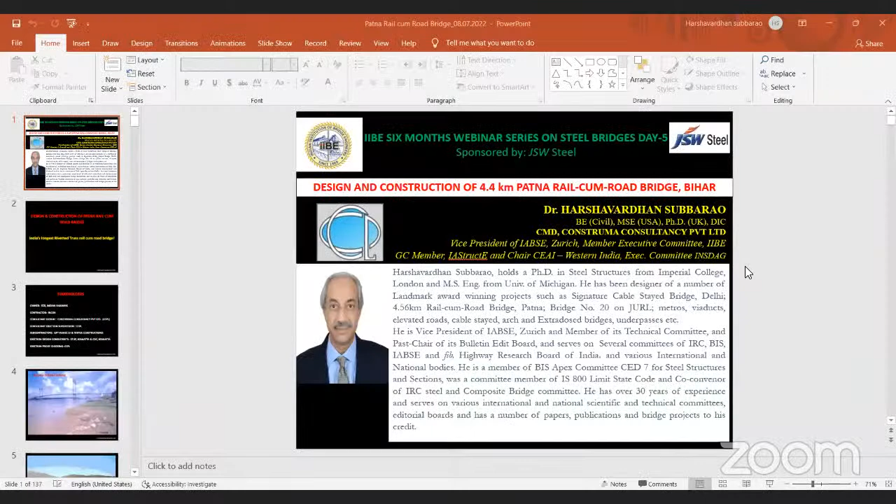Good afternoon all, rather good evening. I was late in joining, so I apologize. That was our Prime Minister on the road, and he held me back by reaching you by 40 minutes.

So on that note, I want to talk to you today about quite an achievement of mine, something I'm very proud about as a bridge designer. In fact, it's as significant as the design of Signature Bridge, the cable stayed bridge in Delhi. This is the Patna Rail cum Road Bridge, which also is in steel, just like the Signature Bridge Delhi. It's a steel and steel composite structure.

Here we're going to talk about trusses today, 36 trusses of 123 meters each built over the Ganga at Patna. And I'm going to talk to you about that today. If there is time, I will move ahead and speak about the other part which I want to talk about, the advantages of building in steel. Okay, so let me start.

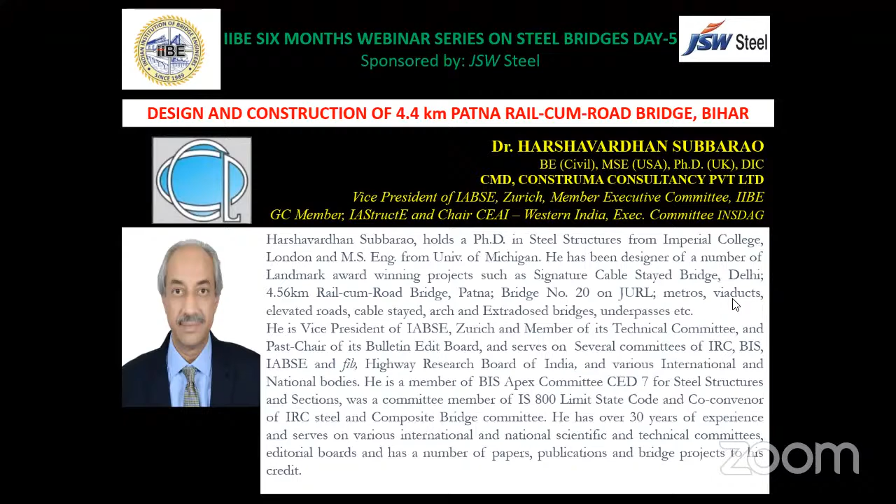So it is the longest riveted truss rail cum road bridge. Bogibeel is welded, and this was the last of those long riveted steel bridges. It is also the third longest bridge in India, they say, on a river.

I want to come to the topics straight away. The stakeholders: the Indian Railway, the contractor IRCON, us as the design consultants, my company. We were also the erection supervision consultants for the entire project. The subcontractors were GPT, Rahi, and Tantia Constructions for IRCON, one on each bank. The erection design consultants for the erection schemes were TUP from Kolkata and CDC from Kolkata. The proof checking of all those erection schemes was again done by us. So this was the project.

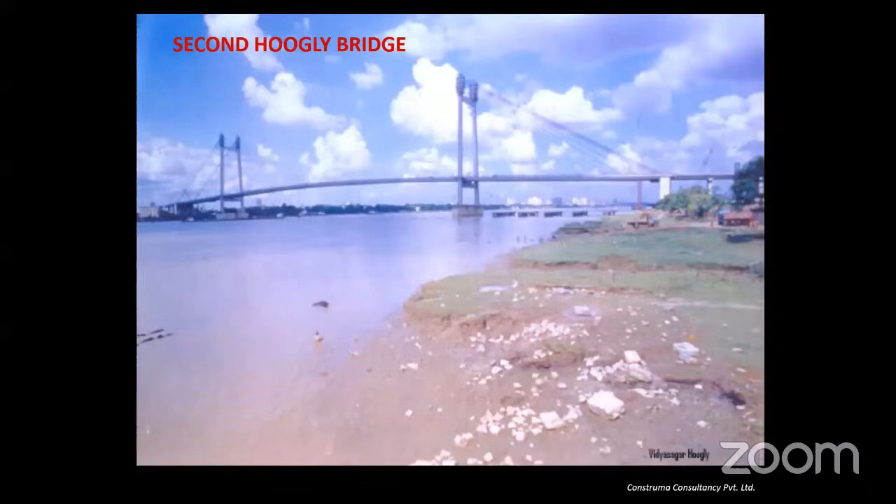As you know, there are a number of lovely bridges that are built. You see here this second Hooghly Bridge, which is also in steel with ladder deck construction. Steel has been around in India for quite a long time in advanced construction and also in various other kinds of bridges.

And I was very proud to be involved with its design and development, and seeing it through till the end was a particular joy. The cable stay bridge has a different type of behavior than the one we are going to discuss today, but I thought I should tell you about where we are going. It's probably our most technologically advanced bridge in India.

A brief about our particular bridge, the Patna Rail Cum Road Bridge. It was originally a rail bridge. Then the National Highway Authority asked the railway for converting it to a rail cum road bridge. So a rail-only bridge with a single track of rail was converted into a rail cum road bridge at the behest of the National Highway Authority.

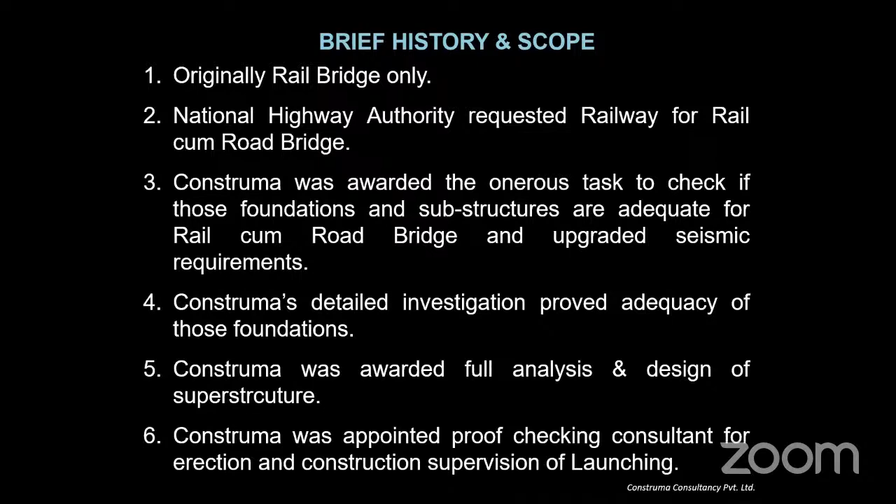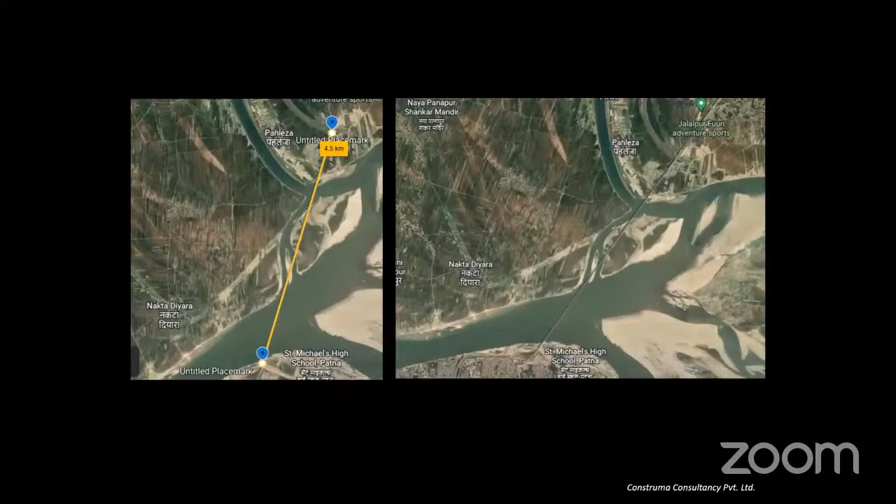You can see here on the right side photograph the already built bridge, its existing alignment. You can see how the bridge spans from one end to the other. In fact, if you stand on the shore at one end, you don't see the other end — it is so long, it's over the curve of the horizon, more or less.

So here you see the road deck, and the rail has a different aspect, which you can see in the bottom right: the rail being on the lower embankment, the road being at the higher deck, both integrating and crossing the river. You see this here very clearly. So that's the general alignment we had, the location and so on, with Pahleza Ghat being shown there.

To give you an idea, those are the two end makeup spans of 64 meters, joining NH19 on that side, NH98 on this side, and the Chapra Hajipur line on that side of the Ganga — the railway line on that side, and the main railway line on this side of the Ganga: Delhi, Mughal Sarai, Howrah, etc.

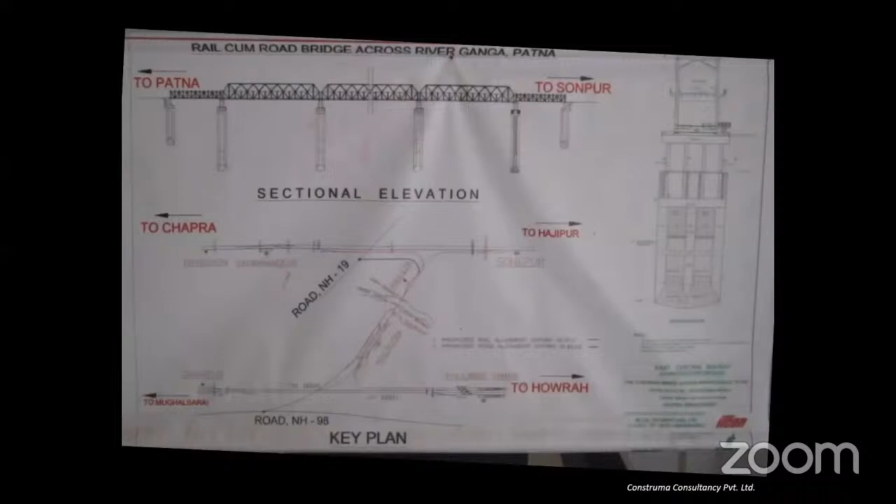It was very strategic to join both these across the Ganga, both from a railway's point of view and for vehicular traffic, because the Ganga bridge at Patna, the MG Setu, was in very bad shape, and this could provide relief. You see on the right the concept that was initially evolved, and then how we went about a span arrangement of 123 and 119.6 meters.

Today I'll be speaking to you about the larger span, not the smaller span. Maybe on another occasion I'll speak about the smaller span, it's not that exciting. You see here the depths of the foundations, 40 meter, 45 meter deep.

The plan at the rail deck, initially as it was conceived, was only for one railway track. These are all from railways' earlier records, for which the foundations were already built, the double D well foundations with these piers, which I'll show you. This was the plan at the rail deck, this is all it was for.

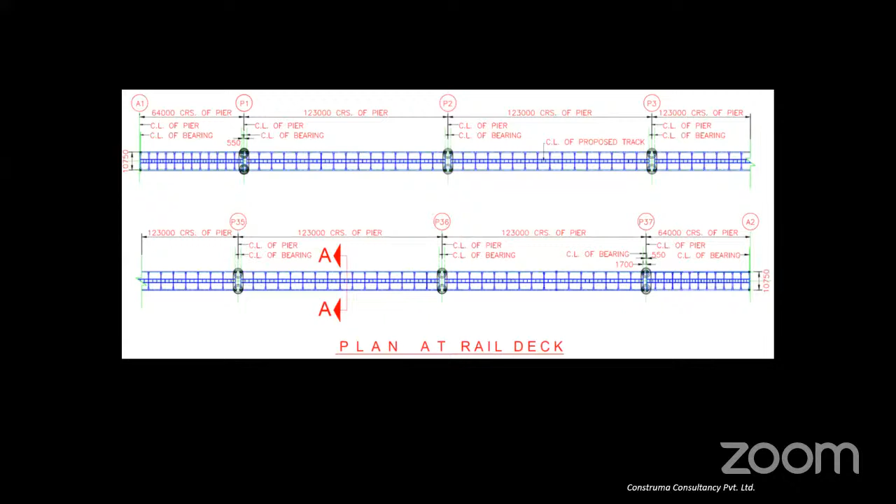So far, it's the longest span truss railway bridge, 2 into 154, which were earlier constructed and was in place and operational on the Jammu-Udhampur rail link, yet to become operational at that time, was already done by us, and we had done that in 3D. That experience helped us a lot and gave us confidence in this design.

The steel truss is an end diamond type arrangement, slightly modified, with 16 panels of approximately 7.45 meters, a height between the centers of the bottom chord and top chord of the truss of 18.25 meters, and a width of 10.925 meters.

All the bottom chords and the first and last diagonals of the truss are box sections, because we wanted their torsional ability and strength. The rest of the sections are I sections, including all cross girders, including the end cross girders, so that we can facilitate joining to the top and bottom chords which are box sections. The I section frames very easily into a gusset at that location, whereas a box on box connection is very much more difficult to frame.

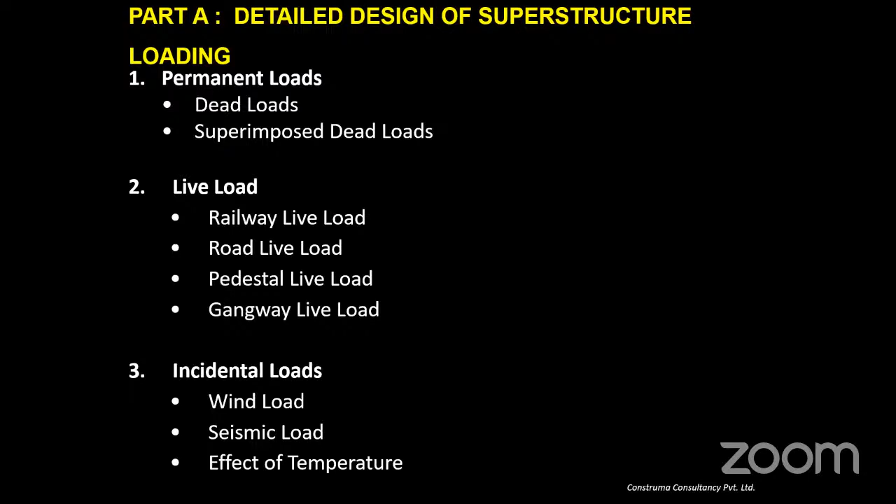The bearings are pot PTFE type. For the detailed design of the superstructure, we considered the permanent loads, dead load, superimposed loads, live loads, railway live load, road live load, pedestrian live load, and gangway live load for when there are gangways at the railway level, for people and equipment carried on those gangways. Then the incidental live loads, of course wind, seismic, and effects of temperature, being a steel truss of a large length.

Earlier railway trusses are analyzed as pin jointed in 2D, but because in the 154 meter span of bridge number 20 we had done a full 3D FE analysis with space beam elements, 6-degree independent degree of freedom space beam elements, we were very much confident, and we went for a full 3D analysis here too. It is correct that it is not pin jointed.

Hitherto, everything was being designed as pin jointed 20 years back or so in the railways, a pin jointed behavior at each joint. But the gusset is very rigid. The number of rivets or bolts that come into a gusset make it extremely rigid, and it lends beyond partial fixity, almost full fixity at that joint. So it is justified to use not a truss element, but a space beam element with 6 degrees of freedom at each node.

That is how we went about the entire project, because this is actually the truth. When the gussets are so huge, they're taller than me, some of the gussets are huge, so there is obviously fixity, and we treat it as a rigid jointed truss, not as a pin jointed truss. That's why we did the space frame analysis for the whole structure of 123 meters.

They are simple support, each span, the spans are not continuous in that sense. They're simple support spanning 123 meters between two piers. Now, wherever the joints were there at the rail level, the same joints were carried up into the road level, which is at the mid level of the truss. All the joints are riveted with HTS, high tensile steel.

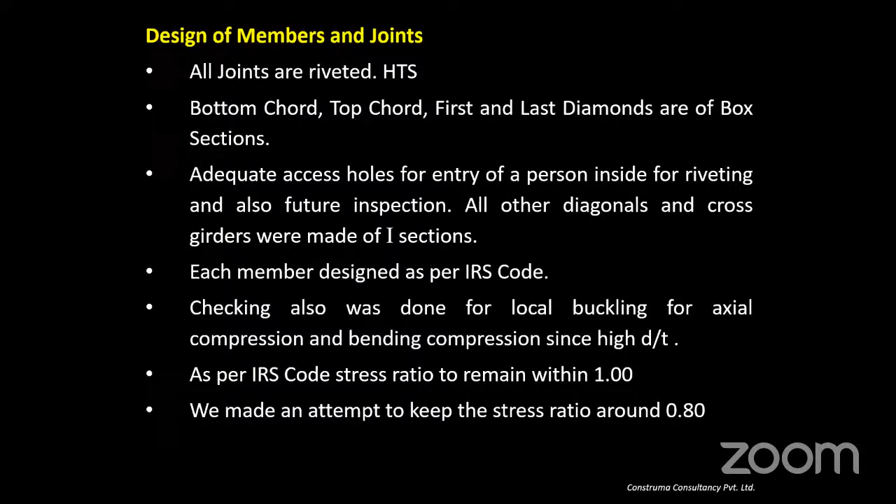Now, provision of pre-camber is very important because when launching, there is only the steel and nothing more than that. When launching the truss, to counteract the deflection, we need to consider only the steel, since there is no concrete yet in place.

Then when the dead load plus SIDL is added, the concrete deck is put in along with crash barriers and all that. Then live load applies. So to counteract the deflection due to dead load plus live load in the final condition, the truss will become flat under live load movement of the train especially, and the road will become flat. Then it goes back to a hogged-up condition of camber, which counteracts these deflections that accrue over time, and relaxation in the joints giving a permanent set of deflection over time.

To guard against that, and also against secondary stresses that happen because, for example, the neutral axis of members framing at a joint are not at the same working point - they are up and down, the members' neutral axis will be different, cross members' neutral axis and main members' neutral axis may differ, creating secondary moments - we resort to giving camber, which is a very important requirement of such a long truss, and getting it right is very important.

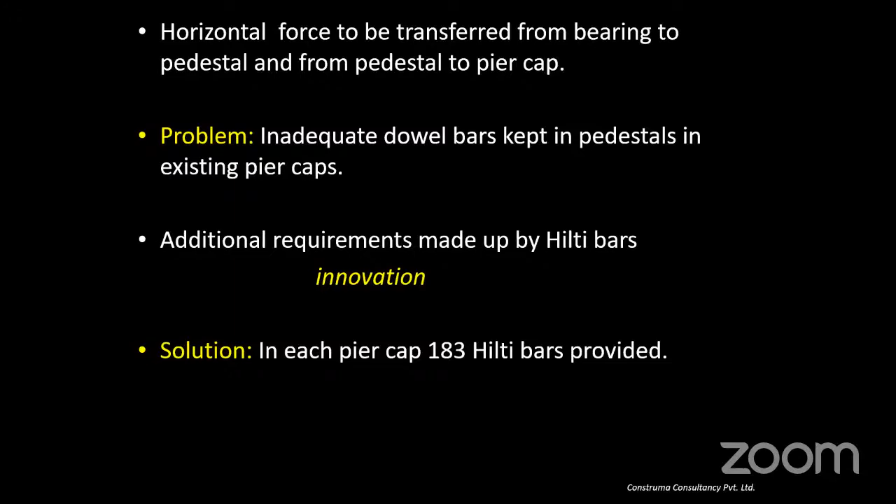Part B of this, which was assigned as the second part of our scope of work, was the proof checking of the already constructed well foundation structures and pedestals to check their adequacy for this increased rail plus a new full bridge deck, which we were putting in the middle. I'll discuss the unique arrangement we made, and how, whilst everything was okay, the pedestals were inadequate, especially for seismic shear and for the restrainers. We innovated quite an amazing thing, which I'll share with you in the next few slides.

Part C of our assignment was the proof checking of the erection scheme of the superstructure. Each contractor had their own specialist consultant, which provided different schemes somewhat. We had to be doubly sure that over the Ganga, launching 24 hours, 365 days a year, there would be no untoward incident when we're about 60, 70, 50 meters over the Ganga River at all times.

So this method of erection was one in which the anchor span is first done. It is used as a ballast, and some tie elements are put between this existing anchor span on staging on each shore, which serves as a ballasting span. We connect it with the link element system, and we then start forward cantilevering from pier 1 to pier 2 in the free air, 123 meters all the way across the Ganges. From pier 1 to pier 2, we triangulate and build up the structure with an overhead crane, and I will show you how that is done.

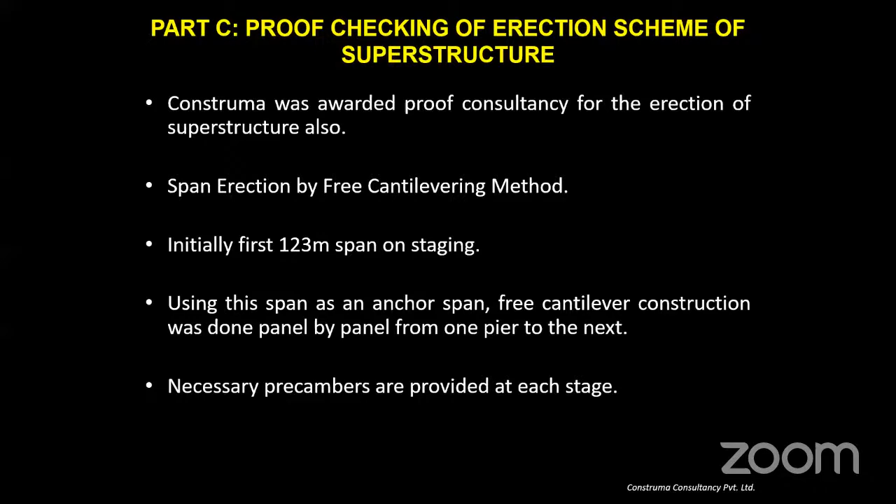Of course, it is very important to have the camber, as I discussed, and that camber has to be designed in and ensured during erection.

There were many contributions we made as a proof consultant, especially on the erection. Because of compression buckling, we had to increase the grade of the steel to 590E from what was a 350 grade or 250 grade, the normal grade we were using. We had to increase the grade from 490 to 590E, a huge increase in the yield stress, and also the thickness of the lower chord elements between the two nodes, L0, L1, and L1, L2, and similarly in the uppermost chord, and then there's a middle level for the road deck.

And the uppermost chord, U1 to U3, we had to change the grade of the steel to HT steel from what it was designed, just because of the erection requirements. Of course, you can imagine why you need that.

That is because the bridge will tend to sag when it is in its fully built condition and in service, but during erection it will be hogging. The bottom chord will come into compression, and when it's at maximum cantilever before it touches the other side, you have the maximum downward sag bending, putting in-plane compression and bending compression, which cumulatively grows due to the weight. And at the L0 node and at the U1 node on top, you get a counteractive couple, contrary to what should be in the normal design.

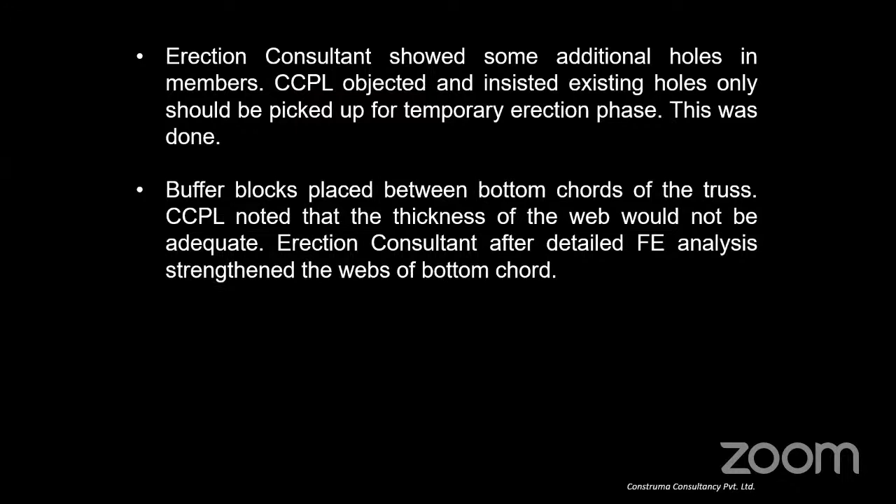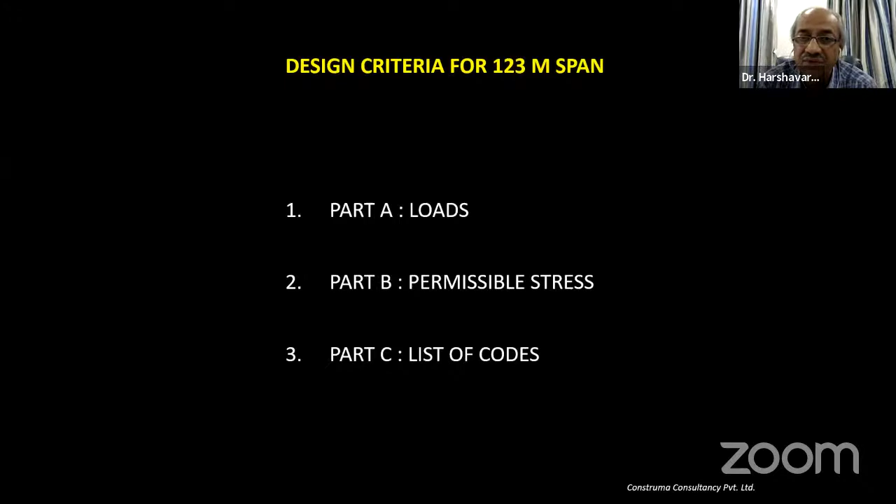So I will now tell you about the design criteria for a 123 meter span. It is in three parts: the loads, the permissible stress - mind you, it's a working stress elastic design, a permissible stress design if you so call it - and what are the various lists of codes for a bridge like this.

Typical loads: it is MBG loading, and you have bending moment, shear, and CDA - CDA is the dynamic augmentation for railway. For a main truss, the two nodes are so far apart, and this gives the bending moment per span, and so on. These are the loads that are coming. So we develop a design criteria for the design of all the elements in bending and shear, and whether they are subjected to dynamic augmentation - something like our impact factor for road bridges - and what the multiplier should be for the CDA for each of the members, and what length should be considered for each member.

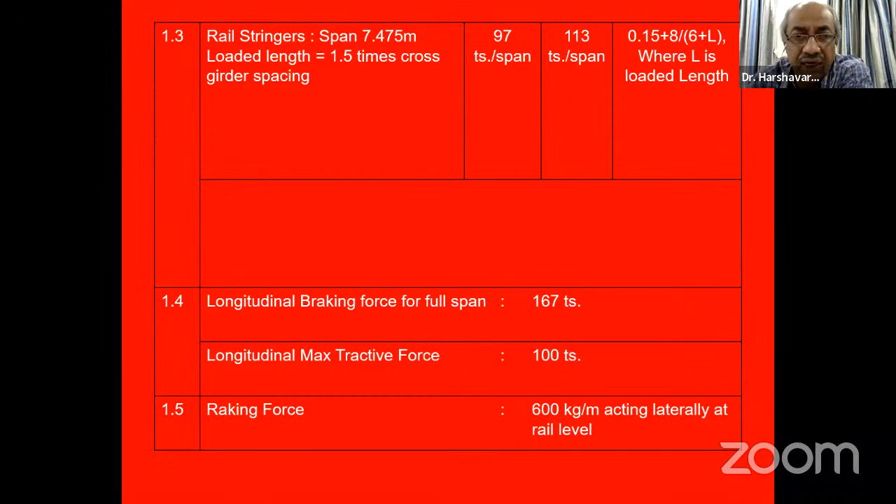All those things are laid down in the loading, and for the road deck also it is from IRC - the road deck, 2 lanes of 70R or 2 of Class A etc., and where it will be positioned. All that is laid down in the design criteria, and the deck slab, the dead load, how thick, etc. - all those things are laid down, the cross girders, everything, the wind that has to be considered, the seismic loading of 0.12 G.

Incidentally, 0.12 G came from a site-specific study. We had earlier designed Munger Bridge, so three bridges - Munger, Patna, and Bogibeel - had very high quality site-specific seismic studies done. When we designed Munger, which had a 125 meter span, 2.6 kilometers long, it was realized that site-specific seismic study must be done for these three important bridges, and a jumped-up factor of 0.12 G is the design requirement based upon a site-specific seismic study for this location. In fact, for all three locations, we were given higher values to design for.

So there are certain bridge rules - the IRS in railway have a document called the bridge rules, which lays down all the loadings etc. for the railway part. For the road part, we take from the IRC 6.

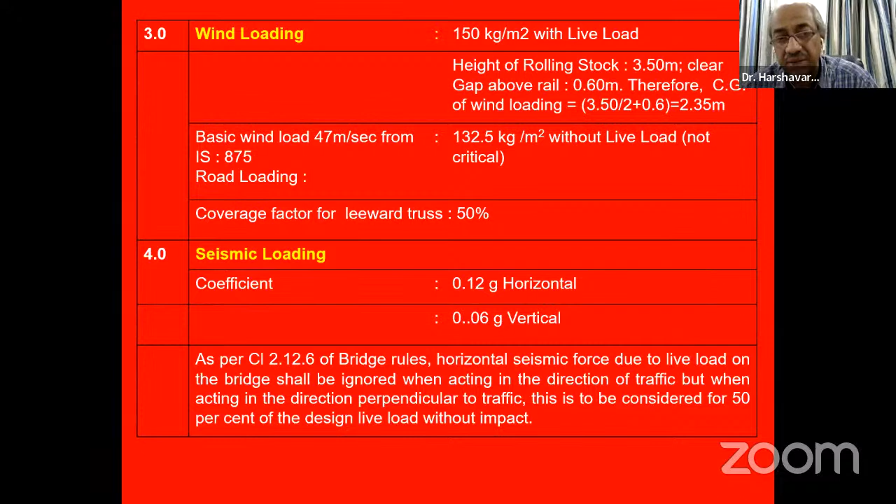And then, of course, there are some overriding clauses when seismic is considered. For example, horizontal seismic force due to live load on the bridge will be ignored when acting in the direction of traffic. But when acting perpendicular to traffic, 50% of the design live load without impact shall be considered for seismic mass. So there are some overriding clauses which we have to cleverly take.

And since it is largely dominated by behavior under live load of a train, the live load by road and the road deck is trivial compared to the railway loading as such. So we, of course, biased that clause, and we have to accept that clause and utilize that kind of combination.

So then you have temperature, the derailment load, which was not considered in this project, density of steel - all these things are laid down typically, where to put the jacking, etc. What should be the girder deflection should be limited to L by 600.

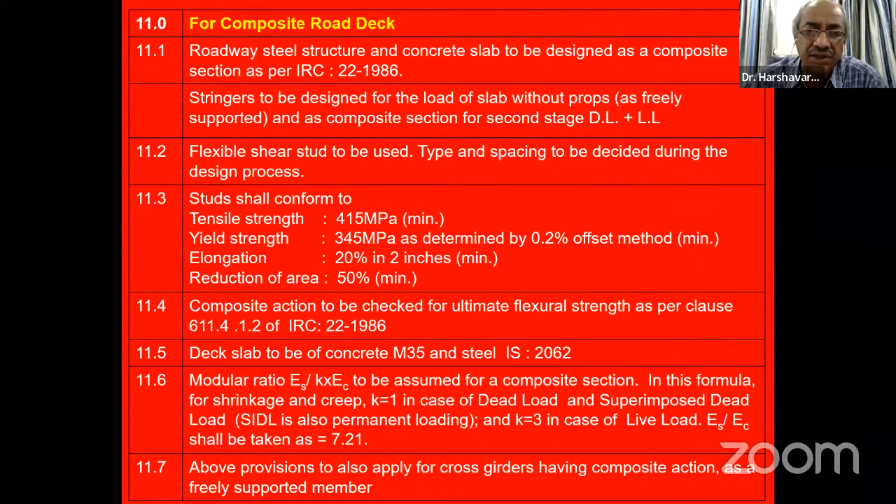All that is laid down, and then for the composite bridge deck, what should be the strength and yield strengths and so on, where the stringer should be, and what they should be the primary phase for, and in the secondary phase when they're made composite, what loads they should be designed for, what should be the long-term modular ratio, what should be the creep and shrinkage that we had to consider, the shrinkage especially for concrete. So all that is laid down in a typical design criteria like this.

And here, in railway, unlike us running our train of vehicles across in the analytical software - we use STAAD Pro, Midas, whatever - in the railway it is made simple. We convert the particular train which is under consideration, like an MBG loading or a 25.5 ton axle loading.

They have different classes of loading like that. We convert them into an equivalent uniformly smeared distributed UDL. It's made very simple, and the bridge rules lay that down. And we simply have to take that and multiply it by the impact factor, like what you see, the CDA.

So it is very simple to convert the tractive force, the braking force, etc., which are particular to railway, into a simple design table like this, and to also consider the loading in the form of an equivalent UDL for that particular train based upon the bridge rules. So it becomes a very simplified approach to the live loading consideration, and the impact factor is directly considered based upon the length of the member under consideration for which impact is being considered.

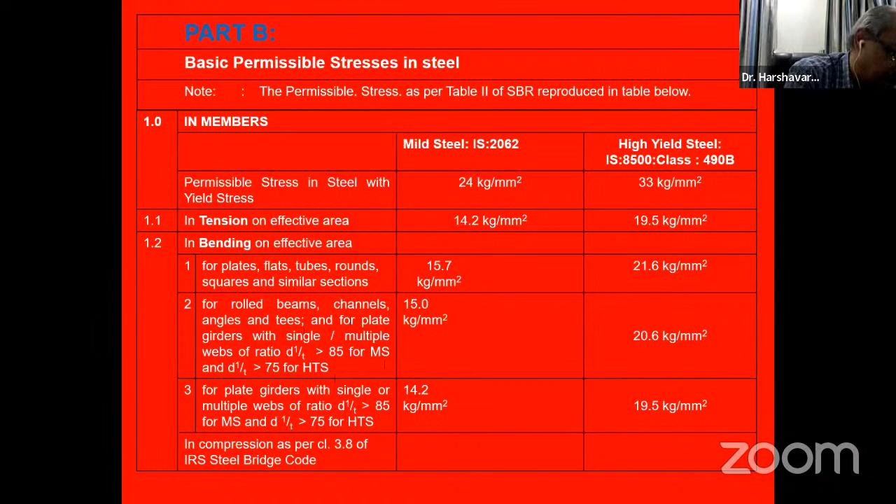So you can see the kind of sorry.

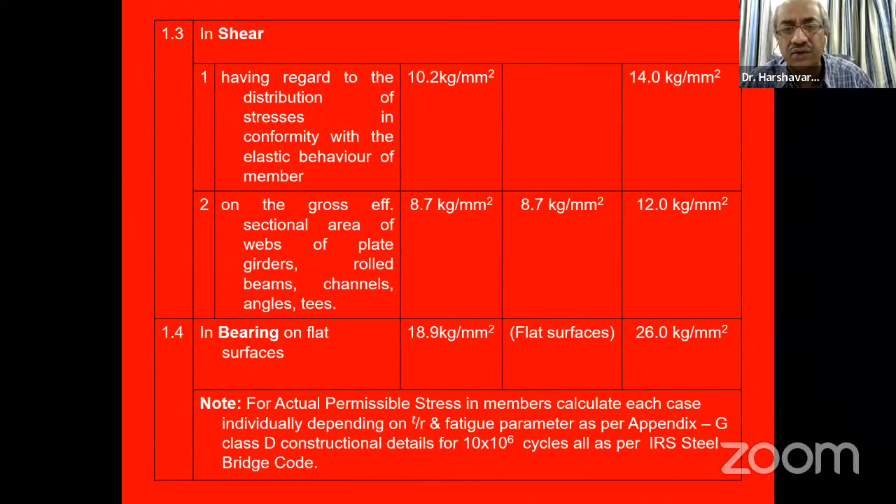Right, so you can see the kind of permissible stresses in tension, in bending, for plates, for different elements, in shear - the permissible values which cannot be exceeded. And this is also now declared by us in our design note based upon the L by R, the fatigue, so on and so forth.

We take it from the bridge rules. Then similarly, the rivets, if they're in mild steel or in high tensile steel, the code to which it is and what it should be, etc., in axial tension, shear, and bending, what should be the allowable stress in the rivet, and whether they are shop power-driven rivets or field rivets - for field rivets the values will be much less.

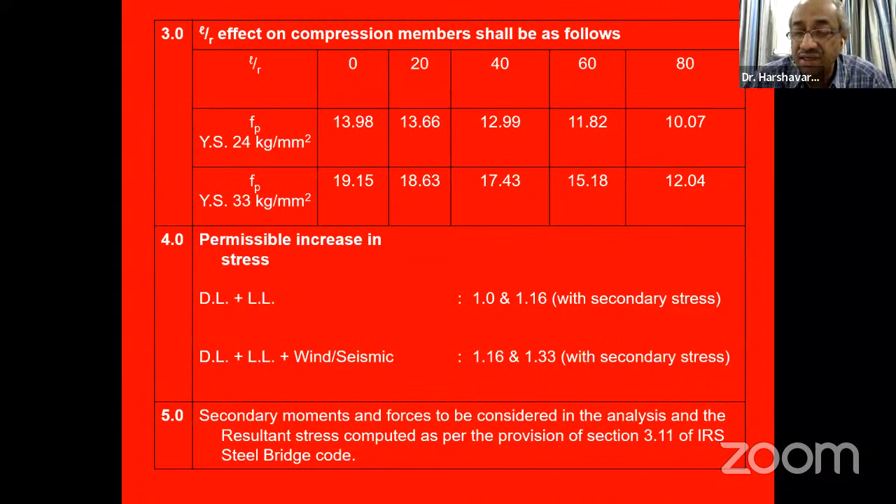So now the L by R effect on compression members, because of course it's a chord, compression, bending, truss-like behavior with some bending is bound to be there, and what are the permissible increases in stresses? When we consider secondary stresses, we're allowed to increase for wind or intermittent actions like wind or seismic, rare events. We're allowed to increase with secondary stresses by 1.33, for example, when we consider the secondary stresses, which we have done because of the nature of our analysis also. So that is the provision. Now, workmanship - there are rules for workmanship and so on.

A list of the various codes to which you design a railway bridge. Any railway bridge has its own codes, but the main codes are, of course, the steel bridge code. It's like your IRC 112 for concrete bridges or your IRC 24 for steel bridges, the mother code. And the bridge rules, which is similar to your IRC 6 for the loading consideration, the allowable stresses, etc.

Then the schedule of dimensions, the moving dimension, very important. You have to clear the moving dimension envelope for that particular train and that particular form of loading. It is declared; you cannot ever infringe into it with any of your structural members. Similarly, the welding follows the welded bridge code for welding requirements and fabrication, and the code of practice for welding, riveting, and the Indian bridge manual at site.

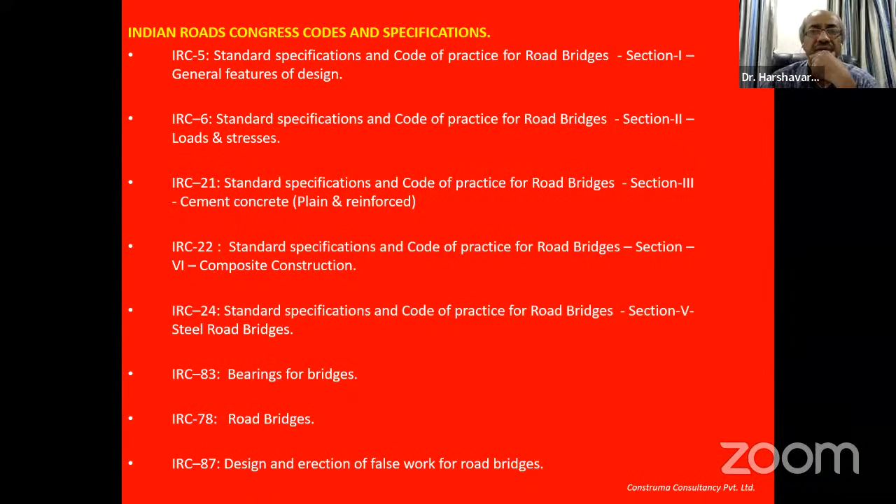The road, I think many of you would know, we have so many of our standards for this. And the bearings, of course, were done to IRC 83 for the whole bridge. The design was based on IRC 83. So that covers other elements such as welding, oxygen cleaning, radiography, how it should be done, and so on and so forth. So many things are covered there.

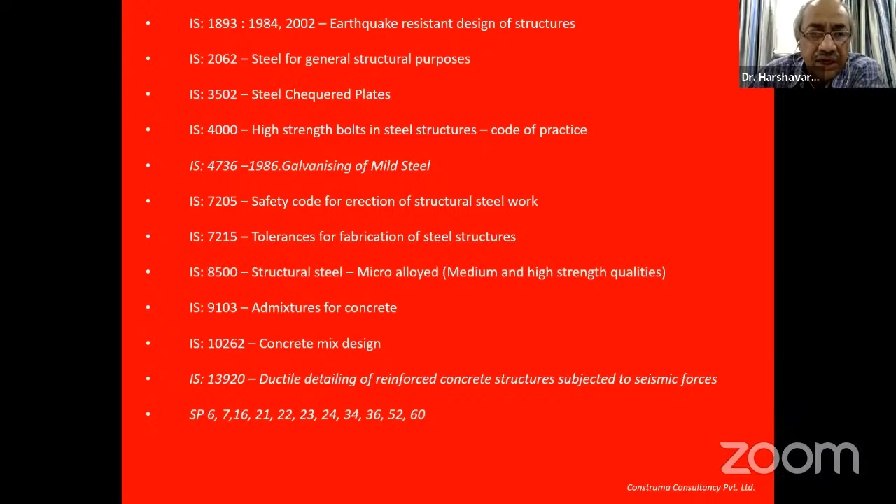And then your IS 1893 for earthquake resistant design, 2062 for that. Then the concrete of the bridge deck, what all code compliances are required for the various elements, etc. And the various special publications of IRC, etc., and of IS also. They are all listed and given. And then the order of preference for international codes, in case we don't have our codes to cater for that, the order of precedence to adopt international codes, all that is clearly stated in the design criteria.

So what I showed you is an example of what a design criteria should be, how important it is to have it in a project before you start, get it agreed by the owners and the contractors, and that will now guide us for the complete design of the project. This is what I want to tell you about the design criteria for a bridge such as this, how you do it, what you lay down, and how it is structured.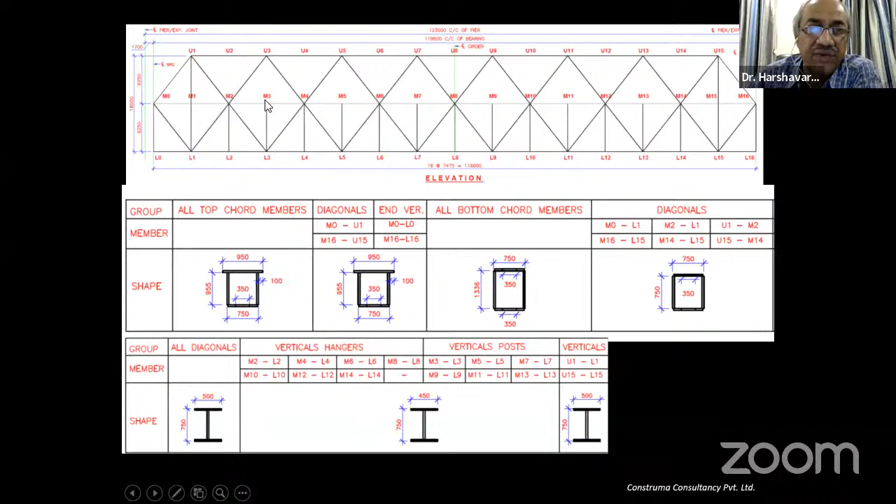See, these are posts, taken from the bottom holding up the bridge, the intermediate deck, road deck. Whereas this is a hanger, taken from that connection, from that intersection down. These are called hangers, and the ones which hold up without any connection at the top are called posts. So hangers are at the intersection holding up there, and these are posts. Okay, so that is the nomenclature we have.

Then if we look at the truss from the top, the top plan, looking at the top of the truss, then we have what is called here a kicker. Typically this is a K-shaped bracing, this is a kicker, and these two elements are tubular members, specifically done so. I will explain to you. They're tubular members set very close to yield, and there's a lot of innovation in this project which I want to talk to you about. I'll speak to you as it happens, what innovations we did.

You see here, it is flattened, but actually this is an inclined plane. From use, the end is actually inclined from here to here. In that plane, we have a particular inclined truss called the portal bracing, which is extremely important to stabilize because all the instability accrues and goes to the end panel. In that end panel, because it is inclined at the top, we have this special wind-based bracing and this very rigid requirement, and it is critical for most truss type bridges, this end portal, with this particular portal bracing in it, very critical.

And to make it rigid and prevent sway and ensure the load path down towards the bearings through the members all the way to the bearings at the ends, because the bearings will only be at the four corners. So at that point, we have to ensure the load path and rigidity at the end portal, to ensure against wind and destabilization of the truss. This is very, very critical to have this portal bracing. It's a very particular design and very important to point out.

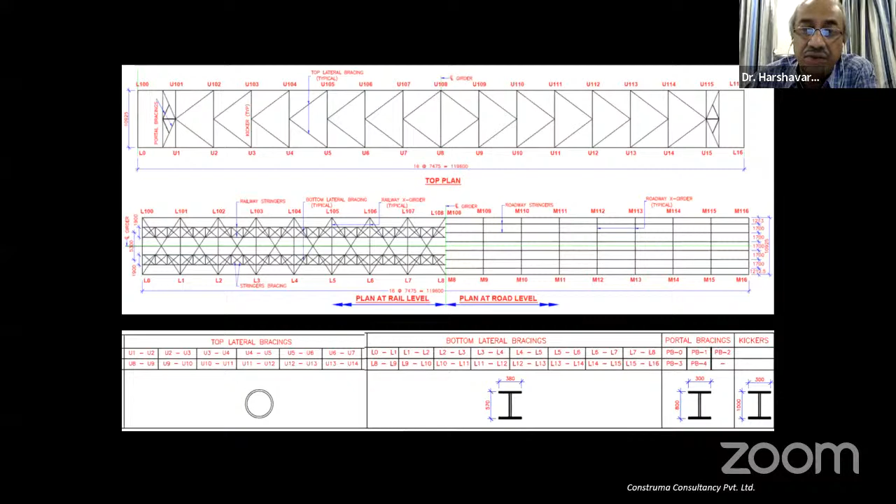Here at the road deck, the number of stringers put are 1, 2, 3, 4, 5, 6, 7, so many. The roadway stringers are put, on which we are putting the precast plank and doing the road deck, cast-in-situ road deck. So stringers serve to break the length, 10.92 the length, to break it up and allow for a better transverse distribution of the road live load, the vehicular load. So those stringers are put there.

Now you see the top lateral bracing, as I told you, they are all of this type. The bottom lateral bracing, the long crossing ones, the X's here, the long X's, are of I sections, particularly I sections, not of flimsy star sections, because this is such a robust truss. We needed to design not with star angle sections, which are very flimsy, and the polar moment of inertia of star angles, two star angles back to back with a gap, is so bad in buckling behavior that we switched to a more robust I section.

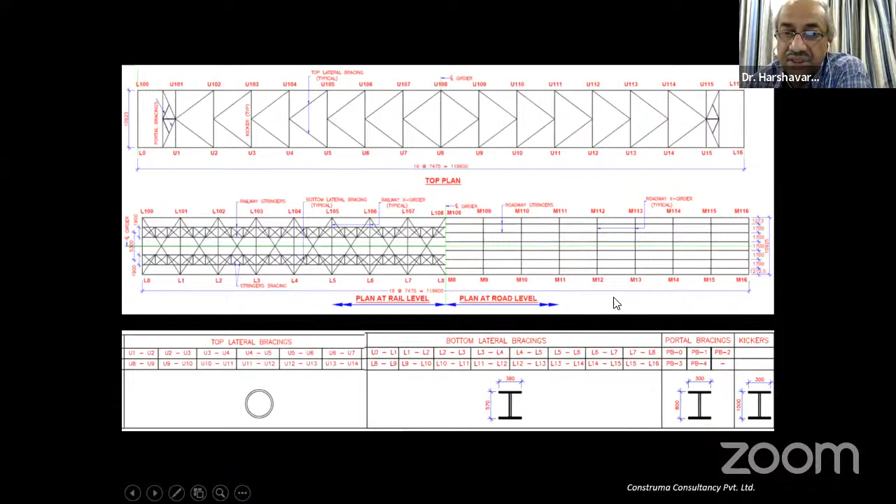This is also probably for the first time in Indian Railways. Then the portal bracing, as I told you, is a very robust I section, and the kickers also very robust I sections. These portal bracings, which I'm showing you, are of this type. And this is what it looks like, a typical sketch of what it looks like.

The two rail tracks, the bottom chords you see here with a line, this is the bottom chord, where my arrows point. Then this is the truss going up. As you look at it from the face, it will incline. It will incline at the end, of course. There is an inclination in the truss.

Then here you have at the road level a pedestrian walkway, and also at rail level we have a gangway, which is not shown here but was added later, a bracket-oriented gangway for people to move or get evacuated in case of an emergency. At rail level there's also an externally bracketed gangway for people to walk, and in the middle is what we call a gangway between the trains, for people to move during inspection, etc. So there is a gangway in the middle of this deck.

Here you see the various stringers of the road deck, with the haunching required there to get it integrated. The crash barriers and so on. The dimensions are 10.92, the clear distance.

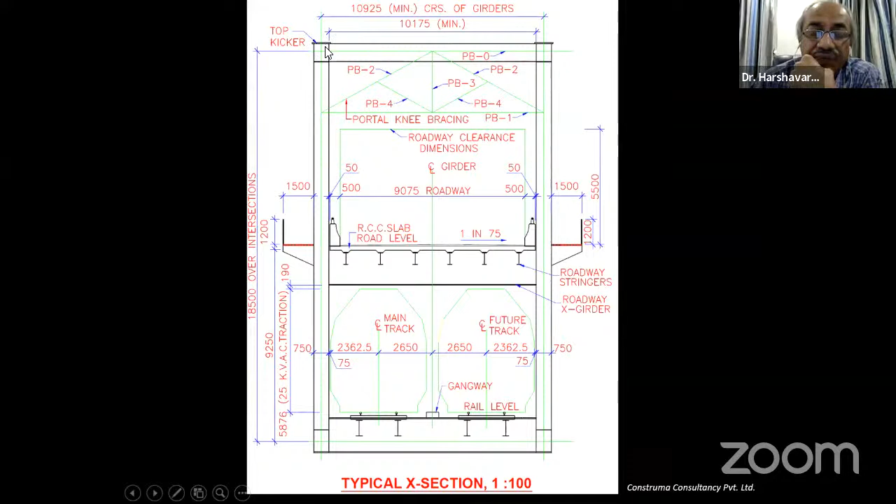Then this is the top kicker, which you see here, which I showed you. And you see here all the various dimensions, etc., and the traction that is required, so on and so forth. All these very particular requirements of the railway with the moving dimension are typically sketched in. It has to be shown to total scale in the figures and so on.

Then a particular feature about designing a structure like this: railway has a particular requirement. Once you do the design, your analysis, load combinations, all that as per the bridge rules, you have to create what we call a stress sheet for each and every member. That stress sheet is like the law. The stress sheet governs everything, okay?

It is like the most ultimate thing they have, and a very convenient way of seeing what are the axial forces, what is the member L0 to L1 and U1 to U2 — we're talking about the bottom chord and the top chord. How much dynamic augmentation you have to take for those. Then what is the dead load, what is the rail live load, positive maximum, negative maximum when it is run, so on and so forth, what it weighs, and what are the actual loadings in the longitudinal direction — railway, footpath, total dead load plus live load, fatigue forces.

Then what are the total basic forces, actual force, in plane moment, out of plane moment, from our analysis. Then the wind forces, these are actual actions, right? In plane, out of plane moment, actual force, in plane moment, because we're doing 6 degrees of freedom analysis. So we get all that, okay?

Now having that, the seismic forces, considering the seismic zone as per the code, then we get those forces also. In the seismic forces, the actual in plane, out of plane, we get, right?

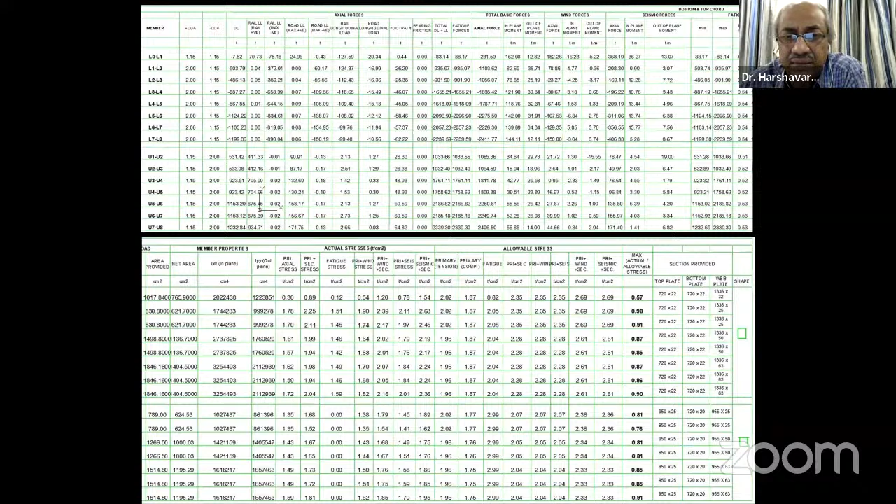You can go back and see whether it is fatigue governing or it is a railway load governing or it is wind or whatever. You can know and you can make the required changes in your design and the resistance side of your approach by knowing this. This is a wonderful thing railways have, and it is an amazing at a glance ready reckoner of where you are and what you are. And every time we update elements or increase thickness, this whole stress sheet changes, right?

So another feature of a railway bridge is, you see, I've shown you, here is our inclined end, and this is the last vertical, okay? And here will be my bearing. And this is my end diamond, which I told you was a box section, and the entire outside of my truss is a box section. Complete entire outside of my truss is also a box section, in addition to the end diamond, of course.

What happens when you launch over the river, you do load shedding and you launch over the river, 100 meters, 123 meters free cantilever. It was probably one of the largest free cantilevering and the heaviest free cantilever probably done in railway at that time, or maybe even till today, I'm not sure. At a time, we were free cantilevering from one pier to the other pier before it touched down nearly 2,300 tons of steel weight, without any concrete, of course, then we infill all that, the middle deck.

So what is this camber? We shall discuss, okay, and why it is to be provided. As I told you, camber is very critical for something which exceeds say 30-40 meters, even for road bridges, but especially for railway bridges, because the railway live load is so heavy. The train loads and mineral loads and the goods trains and all these things are so heavy that when they ply, the truss automatically deflects down under the live load. In any case, it will deflect under dead load. In any case, it will deflect.

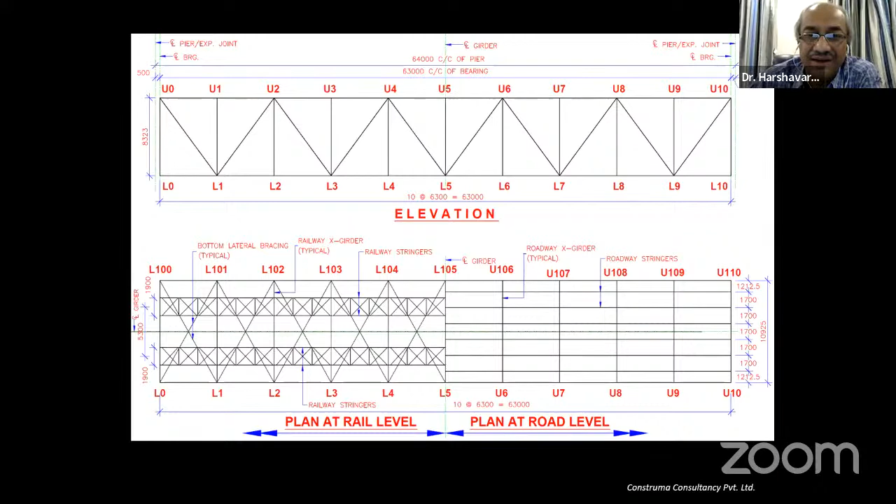I won't talk about it in this particular case, but just to show you what it looks like, it looks something like this. There is no further height of truss. I don't need it. The span is short. I need it to get my Z.

You see the restoring couple T and C, right? Tension and compression in two opposite directions. Bending is maximum in the center of the truss. I need a double height truss.

I needed that 18.75 in my 123 meter truss because of the span length. And it goes up, moment goes up in L squared terms. So between 64 and 120, there's a huge difference in length. And because of that huge difference in length, my 123 meter truss required that 18.75 meter height.

And therefore, it's a two-level truss in the 123 meter, with the road deck in the middle. I need to get the Z to compensate the bending moment which will happen in my service condition. In the shorter span, I don't need to get that much Z. What I have here is more or less sufficient.

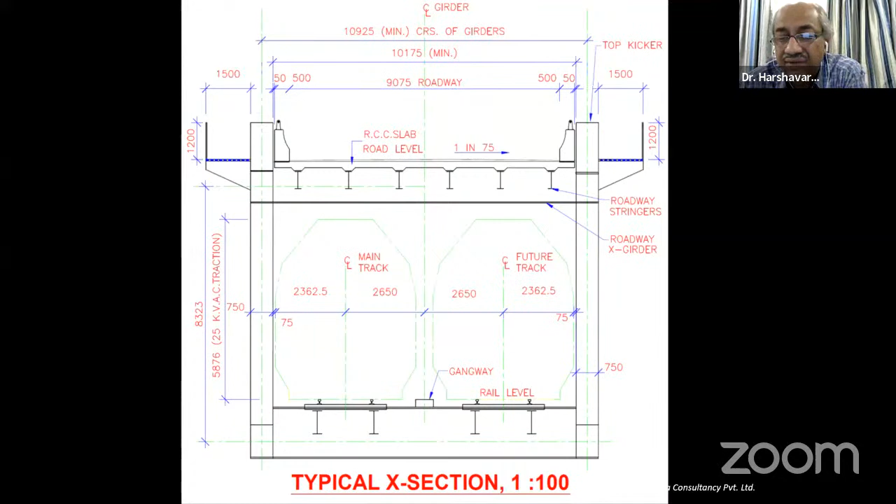Now, the bearing layout is very, very important to understand. You see these bearings. So what you have here is a fixed end and a free end. There's a fixed end in a truss and a free end in a truss. The circular, what you see...

A and E, at the fixed end, we have a fixed end bearing. Here we have the center line of the bearings. By a very clever arrangement, we extended this bottom chord to get this separated longitudinal bearing here. So these only take vertical reaction. The longitudinal action is taken on this bearing and the transverse action is taken on this bearing.

These D and D are the jacking points. So when the truss is agitated in this direction, if my bearing fails, the longitudinal effect, only the vertical is taken here. The horizontal, I have to separate both longitudinally and transversely.

So I have to provide bearings B and C because of that 25% exceedance rule, where if the horizontal forces exceed more than 25% of the vertical reaction, I have to separate the bearings for horizontal action in both directions. So there I get B and C, and this only takes vertical.

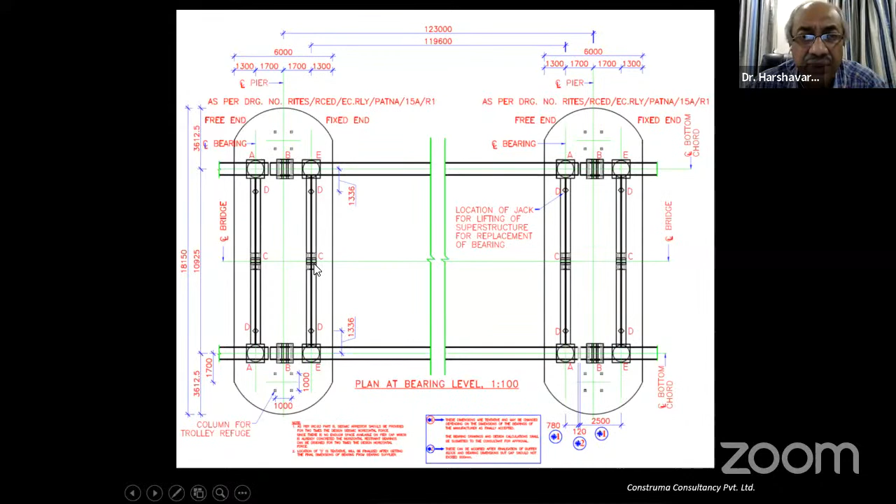So this is the situation I wanted to tell you, how the clever bearing arrangement has been made so that in the longitudinal direction, this will take the seismic action and fail, and this will take the longitudinal seismic action and fail, because they're designed for seismic as well as horizontal or longitudinal action in each case.

Once both these fail, it fails—all those bearings fail. They are designed for 1 times the seismic force in the longitudinal and transverse direction, as I showed you for the bearings. Now the bearings fail. My truss has done its job, the fuses have gone, my bearings have failed. First my top fuses have blown, as it were, and they have done their work. Then, even then, my seismic case design for my bearings is there—my pot PTFE. Then my pot PTFE bearing also fails.

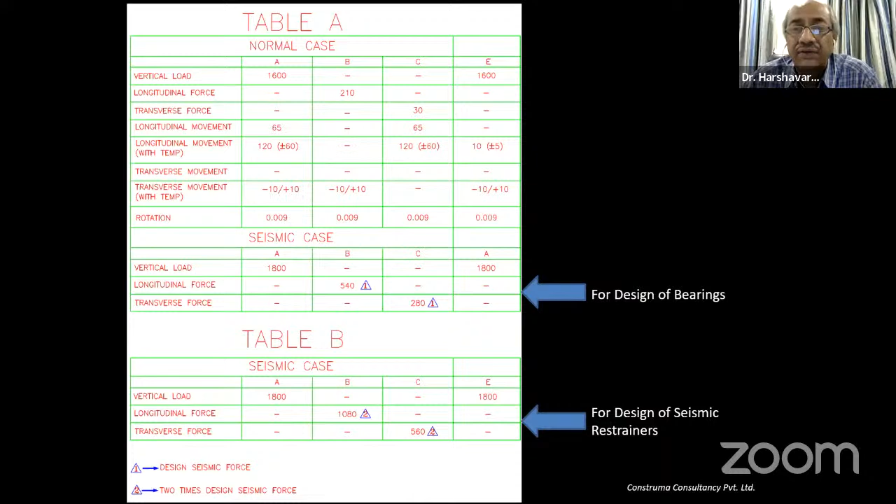I have a second fallback, another phenomenal incorporation in this particular project: 2 times the value of seismic. You see the lower table, 1080, 2 times 540, and 560 is 2 times 280. In the longitudinal and transverse bridge, the seismic restrainer specially designed for this bridge, using a very unique concept innovated for this bridge, is set at 2 times the seismic force at failure of the bearing. So my truss not only has a fuse, then the bearing which takes normal seismic, then 2 times the seismic will be taken by my seismic restrainers, and my truss should not nominally fall even under a very severe, very demanding earthquake. This is the robustness of this truss—this is what we innovated and put into it.

All this, which you see hash-shaded here, is the built-up elevation of the pedestal and augmentation of the pedestal size. Between the pedestal of that span and the built-up pedestal of this span is trapped a downstand in steel—the longitudinal seismic arrestor, and here the transverse seismic arrestor—designed for 2 times the seismic failure force of the bearing. So this innovation is designed to take that 2 times seismic force. The pedestals now resist 2 times the seismic force because the original structure given to us was completely deficient in this one issue. It was robust in the substructure and foundations, perfect for the increased demand load, but incapable of handling the earthquake, especially the 0.12 G from the site-specific study.

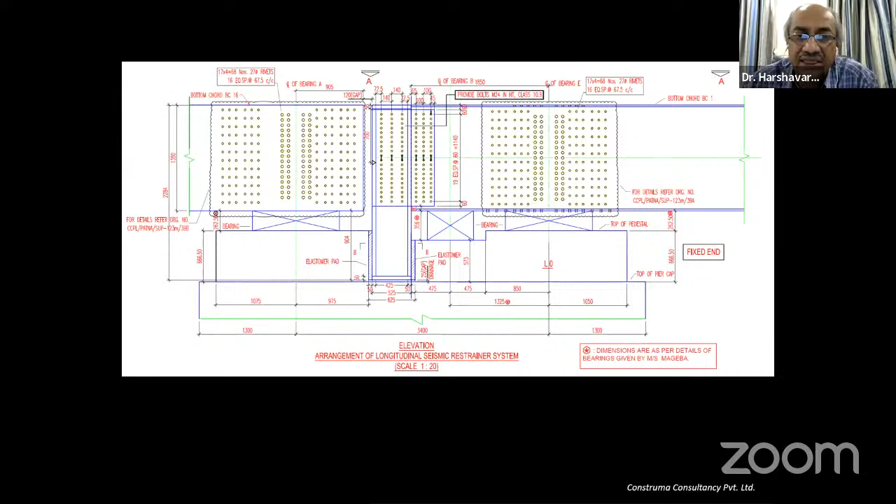I'm showing an example of this downstand and how the elastomeric pad is inserted there to reduce the sudden impact during the earthquake. Even for that, we have put in an elastomeric pad which can breathe during normal movement of the truss, such as due to temperature—all movement is possible in that gap. Here you see the stiffeners we had to put in; I'm showing you a plan of how these stiffeners are placed.

Then a problem came up about how they should be closed, how they should be welded and where, and so on—there were so many details to work out in the construction methodology, so we gave 2 options. How these stiffeners should be welded, fillet welded or butt welded, and how the top plate should be closed, because once everything is closed, how do you close the top plate—so on. We had to give detailed schemes and think carefully about all of that.

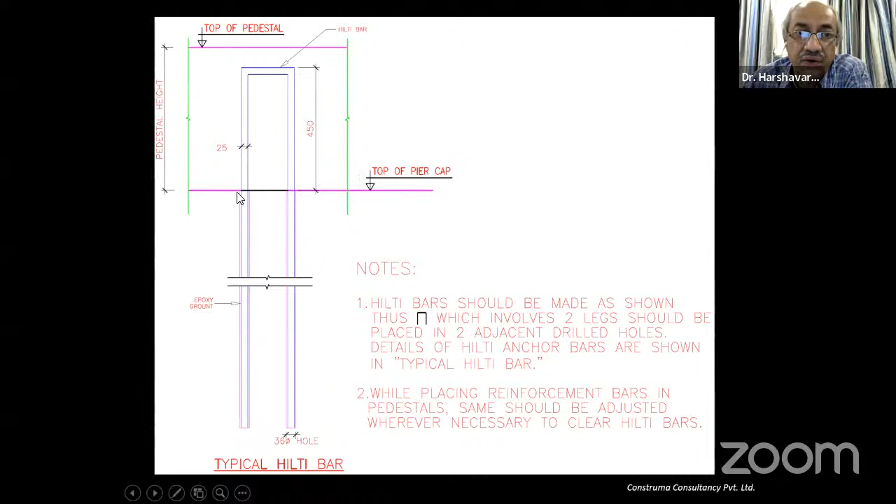Here you see in dots in this figure, all these dots are the U-shape, deeply embedded, epoxy grouted. Here we have the epoxy grouted part, and here you have the projecting part into the built-up pedestal, as I told you, this pink shaded pedestal.

The little dots you see here are the arrangement of pins, and here also you see these U-shaped pins, which are inserted and systematically organized to augment the pedestal's ability to take 2 times P and send those forces down into the piers. So this is the pier cap and then into the piers. Now, this is a supreme innovation, I would say, in this project.

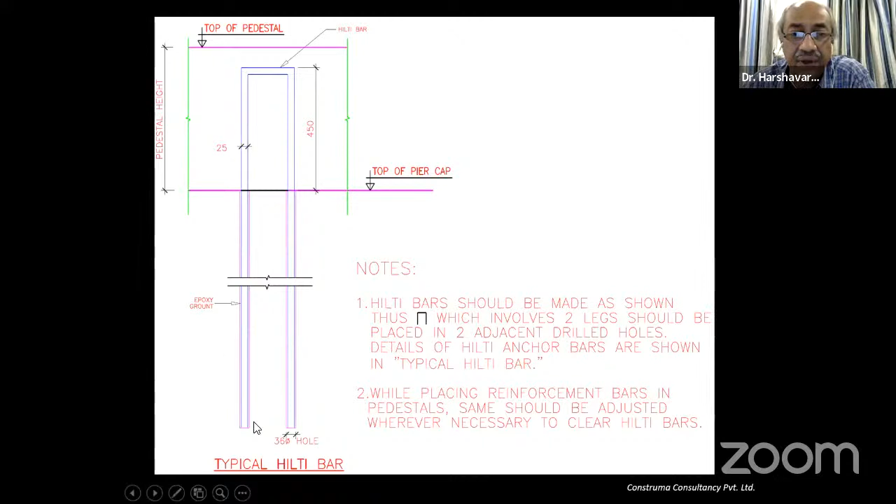I hadn't seen it anywhere else, and this is how we went about doing it. The failure modes, as you know, there are 3 failure modes that happen for that typical member. How much should be this depth of burial, which we have to drill into the existing concrete pier cap? How much should be the depth of burial of that U-shaped bar? There are 3 failure modes.

You see, the failure mode of a bar, when it's epoxy put in, it can either fail by the bending of steel, because it will fail without this coming out. Let's start at the other end. The easiest is it will completely pop out of concrete, pulling out directly because of insufficient bond length. Or it will fail because the epoxy is useless and doesn't hold, it simply pulls out. Or it will fail by bending because it is so rigidly held inside the drilled hole that it can only fail in lateral bending of the U-shaped bar or the anchor.

And this is the most preferred steel failure mode, which is what we designed for, because after all, we're depending on 2P. At 2P, we want everything to go in yielding, right? We want to have the full reserve of yielding in my steel bar so that my truss does not fail, and we get the ductility of steel. I am telling you, this is the way we have further enhanced the design.

And we use this Hilti HIT-RE 500 to drill and blow into the hole. We drill a hole, we put that in, and the whole depth was sometimes up to 1.6 meters into the very deep pier caps. And this is the resin pack, the drill gun, etc., to shoot the epoxy in.

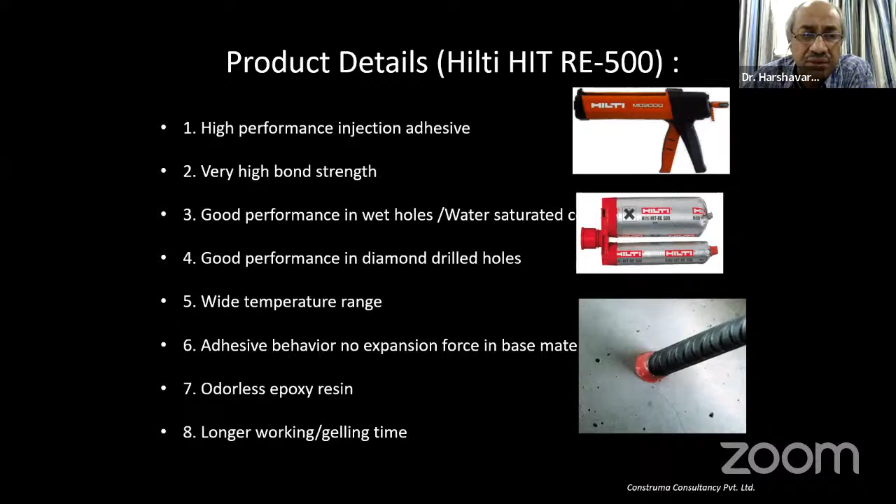And for getting the concrete cone of failure type, if you go up to 250 millimeters depth of burial for my anchor, it will fail simply by concrete failing, and I will never be able to reach the value of yielding that I require to ensure that 2P is available to me. By the failure of all these, everything goes in gradual failure, successively. So this is the level of innovation that is there in this truss, and it is, I think, quite unique.

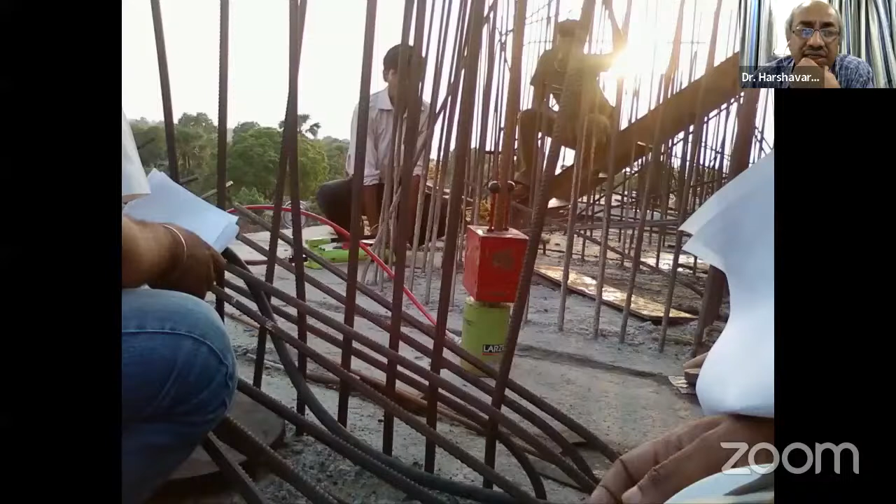You can see the Hilti being installed, blow, dry, etc. They've got a particular quality control procedure. Then pull-out tests are done. We see the max pull, the pull-out test is calibrated, and actual pull-out tests are done to ensure I get my yielding failure mode of the steel rebar, and not failure of concrete.

Now, how about erection? Initially, we do trestles on the anchor span. On the shore side, we build up all these foundations, we put these trestles. They are called Christchurch cribs, and they are very easily available with the railway contractors. They build this up, then give proper bracings and all that, well braced.

And then this 123-meter span, from the road, we will erect and put up - we have access, there is a dry area, not a wet span, a dry span. We will erect this and make this a truss on top, and we will do it with a crane on top. Okay, I will show you that.

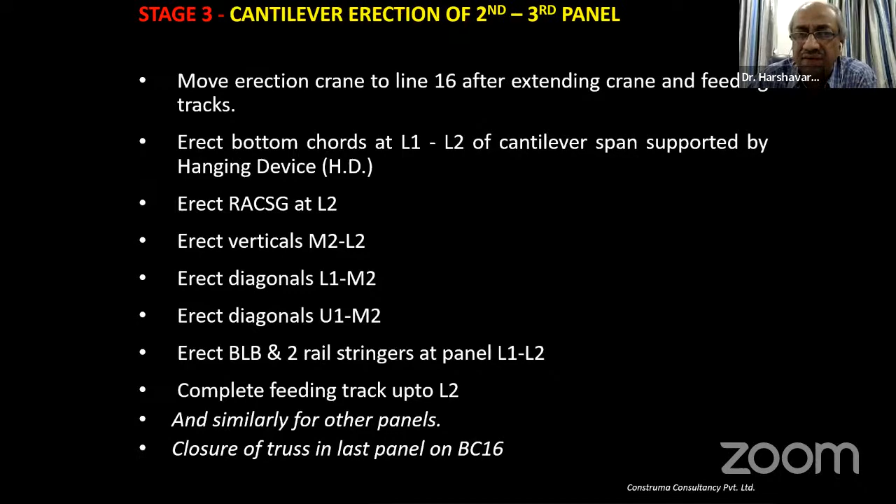I will show you how that is done. We triangulate and complete the first truss. I will show you in photographs - you will understand that better. And I'll show you the erection sequence in photographs, which you will better understand.

So now suppose we have finished this truss. Then we put a crane on top - this is called the main erection crane. We put a crane on top of the already built truss.

We take away all those stagings. Here we have a feeding system. We take away the stagings from below. And now on this field, suspended, I mount this spanning between two piers.

I mount my erection crane, and it goes on rails on the top end girders, the top booms, top chords. A temporary railway track is laid, and on that track, this main erection crane, which you see on top, moves to start triangulating and building up the forward truss to the next 123 meter span from one end to the other.

For doing that, in between both these, I tie them with a so-called link element, because remember, these are inclined members at the end. This is an inclined element, you see.

So between the two inclined members, I put in a T-shaped filler element, which has turnbuckles to adjust the tension, and lower and increase the height.

And here we have what we call a hanger. Here we hold up the bottom chord by a hanger from the previously erected element. And so on, we go ahead by holding up with hangers, putting in the bottom chord, and then finishing up the triangulation. The feeding is done at the lower level.

There is no road deck. Load shedding is done, and we try and push this from one end to the other with duly load shed. We remove a number of the critical members which are not required, and the lightest possible span is then tried to be erected here.

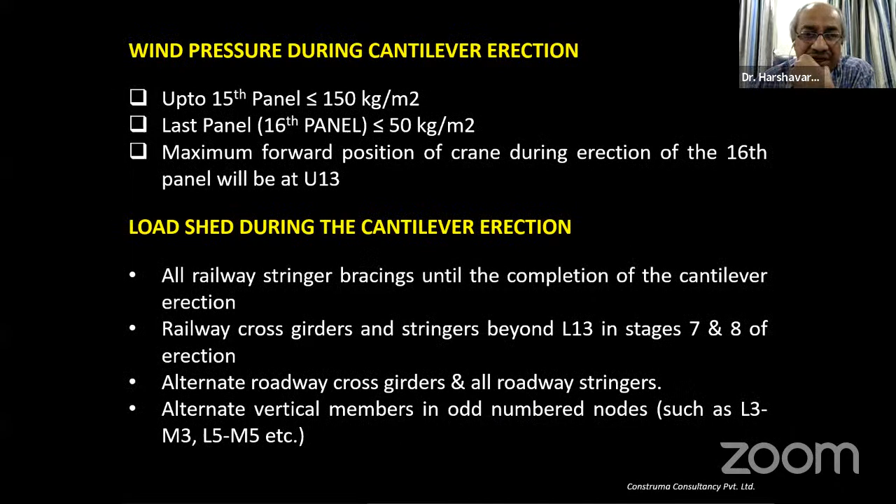So I won't get into much detail, but in a nutshell, I've told you how it is done. Okay, what is the problem you get?

If you're an engineer and the contractor suddenly changes the concept of erection, or you as an engineer have not pre-thought the way this will be erected, or you come into situations where the contractor does not get certain thickness of plates and the whole thing changes, then you must have a contingency approach. In this case, for the first time, because there's such deep webs, the web is 1.36 deep in the bottom chord.

So this typical web panel here became susceptible to in-plane buckling in waves, a typical plate-based compression buckling, because of the depth.

Now, though we have diaphragms to arrest and so much stiffening inside the box. Of course, at each node, you have to have very strong diaphragms to arrest torsion and so on, especially over the bearings. We have 3 lines of diaphragms over the bearings because of some accidental shifting over the bearings. We have 3 very robust lines of internal diaphragms inside the box so that the load path to the bearing is ensured, from inside the box down into the bearings.

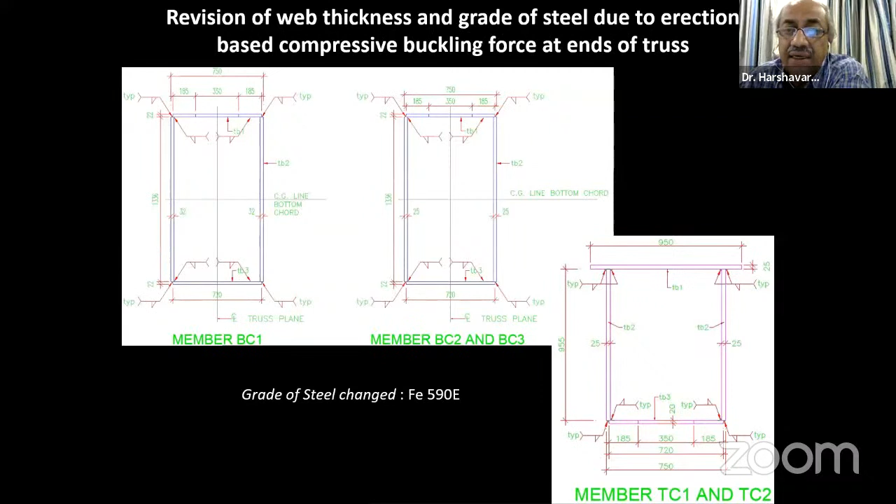Similarly, now that I've increased this, I need to handle Z, right? Z is I by Y. So when you increase on the compression side, you have to compensate on the tension side, which is the extreme top. And there also, I didn't need to change the thickness of the web, the flange, the TB1 and TB2 plates, as you see here. I didn't have to change the thickness, but I had to change the grade to handle the additional stresses that were coming from the increased compression at the bottom, the compensatory Z requirement.

I had to increase the top plates also in this case to compensate. So, only in terms of the grade of steel, I did not have to change the thicknesses at the top. At the bottom, I had to, because it was buckling prone, of course, in compression.

Now, some photographs. These are typically the holes which are very systematically drilled and so on. I won't get into the fabrication stage today, but these are typical stiffeners, typical I sections, lying at the side. Here you see the hat type section with a projection of the end diagonal or so, and the various types of members put at site.

And here you see, on staging, the shore span, the ballasting span being erected on this shore base staging. At the back, you see the 123-meter piers going out over the horizon, all already erected, and on top of which the Hilti work, the pedestal augmentation, and the seismic restrainer innovation was done for all those piers.

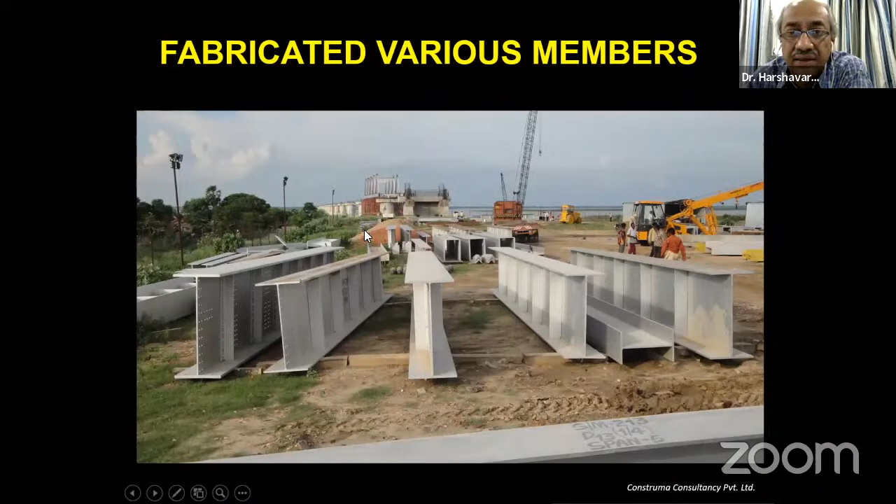You see, these are drift pins, and they have drifts and pins. They shoot them through these, and sometimes they ovalize the holes, the holes get ovaled. Because of that, hot riveting is still preferred by the railways, even in spite of HSFG bolts.

A rivet is heated hot in a tandoor, and that is hammered from both sides with a dolly to give it a shape. Red hot, in a tandoor, it is put, and the workmen hammer it up, and they make the rivet.

Before that, to hold the things roughly in position and place most of the holes at some critical points, they will shoot the drift pins in. They are just drift pins, and they actually sometimes change the shape of the hole. Because of that, a hot rivet goes and fills up all that gap, that untoward gap that happens. It fills it up and makes the hole completely filled, because it is put in hot, and closed and hammered.

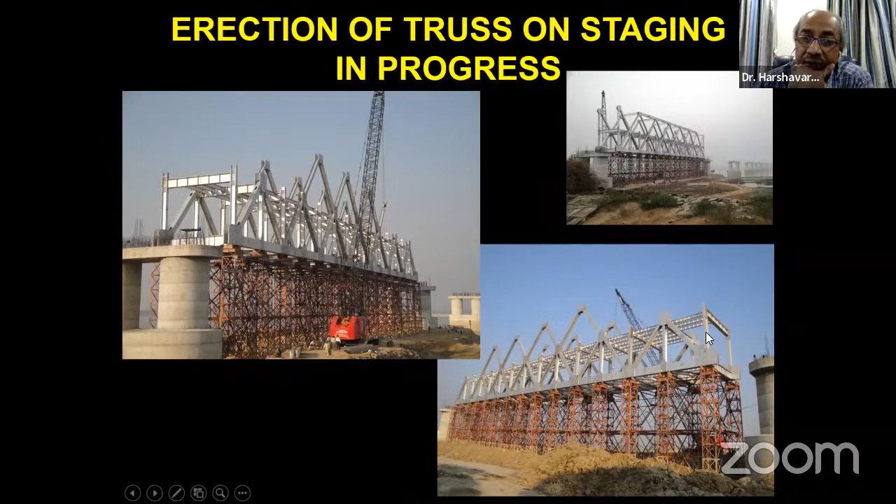We then go ahead, putting the next member in, the forward member, we see here. And closing is done on the last panel. The bottom chord goes across.

This is still in the dry spans. The bottom chord goes across, and then this end member is pulled, and the truss is then closed. Okay, this is a very important action, closing of the truss, right?

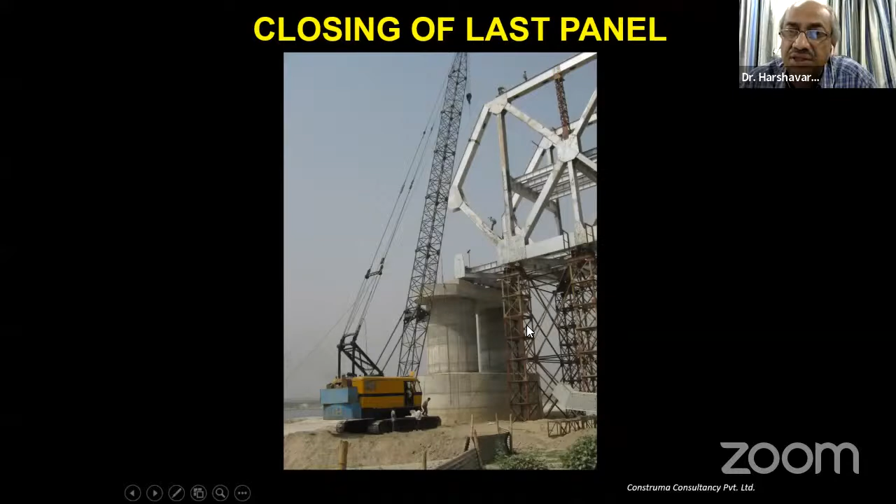And here we were lucky, we could still do it on staging for a couple of spans. And then you see here the shore truss span erected completely. And you can see the various levels people are working, etc.

Here you can see, you can go through the hollow, you can walk through the box required for doing the riveting, etc. from inside the box. Similarly, the hollow top chord member. Here you see two holes at the end through which people can go and do the riveting action inside the box.

There are oval holes which will then be covered by plates, so that you can work inside the box. The box is so big and deep that you need access in the main members to work inside the box, which is given, I'll show you.

Here you see the road stringers, typical road stringers. Here you see the most important end portal here in this cross plane, in this inclined plane. In this inclined plane, you see that main post like a king post.

You see this end, this is very, very important because it should never sway. There should be no sway that happens here, otherwise there will be a lot of problems. The load path of all forces is ensured through this and goes straight into the bearing. The entire load path comes here and goes into the bearing. So this is a very, very important item and requirement in such a kind of truss, in this inclined truss, in this inclined zone, that you have that end portal - a very important feature.

So you can see here the work being done. We've brought to site the table for the erection crane, which will go to the top of this truss. You see the size of a human being here, and at what height we are operating—it gives you scale, what scale we're talking about, the size of the truss.

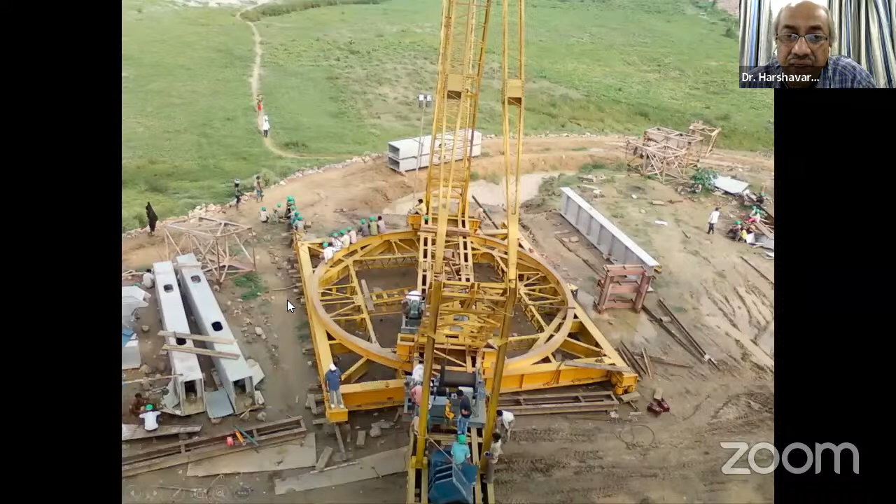The turntable can rotate. This top main erection crane works on a turntable which rotates, and here it is assembled, tried at ground, disassembled after it is load tested, then disassembled again and erected with a mother crane—a crane lifting a crane—to the top, and it is being assembled.

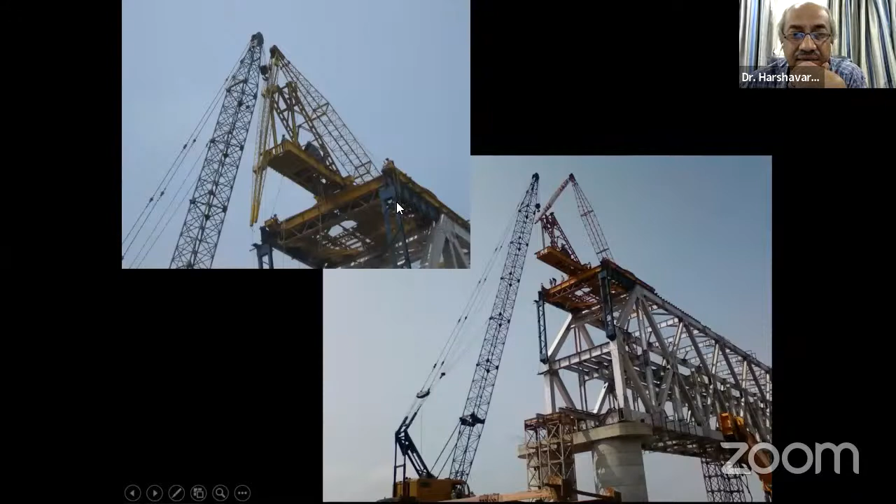You can see how the crane is lifted, its boom is lifted, etc. The whole crane is assembled at top. Here you can see the movement ability, like a Meccano. You can see here also the hole for the next member, and you can see it will go. This is the next truss.

Here is one pier, and on that pier is this truss which goes leftwards, and this truss which goes rightwards, and the erection of that has just started. This is the temporary link element. Since it can be done on staging, this link element was just being assembled.

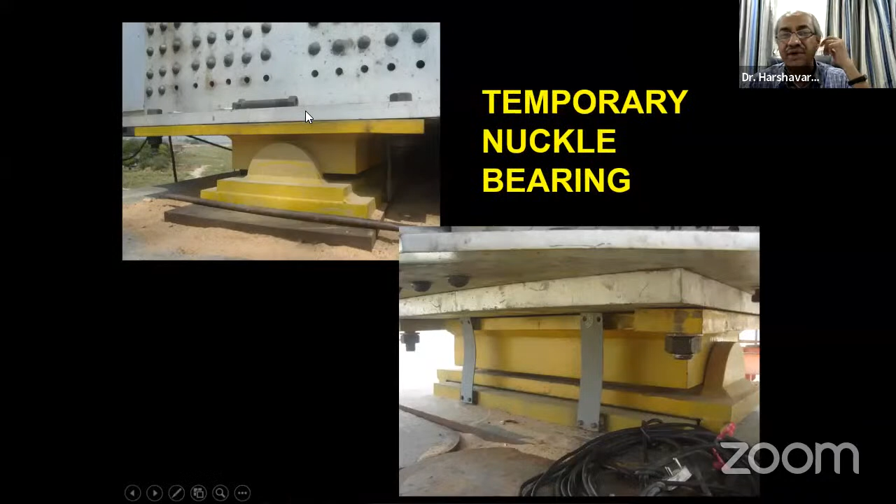We insisted on those bearings below here at this point—temporary bearings during erection, before the main bearings are put—these knuckle bearings. And it was good we did that, and good we were vigilant, because the cracks were developed.

If we had not been involved with the supervision and vigilant—and Mr. Srinivasan, our site in-charge, excellent engineer, he used to go everywhere in the truss, everything he used to see, brilliant man—if he had not noticed and sent me this photograph and said, 'Sir, I see something is wrong,' I said stop the erection completely.

When you see something like this—if I have 2,300 tons over the Ganges and you have a crack like this, for whatever reason, fabrication or poor material—it will just fail. This bearing will fail and my truss will collapse. The truss is after all sliding on this knuckle bearing during launching, a sliding situation. It will simply fail at this point and my whole truss will come down.

So this is one issue that happened. Being vigilant as supervision consultants, we stopped the erection and we could prevent that.

Between the two bottom chords, this is the concrete end plates and this is a buffer block. We insisted that it should be held up and tight because we didn't want it to slip. And they wanted to keep it in free air like this.

The erection consultant—we told them to put it on a stand. Like when you have a jack, you have a packing below; in case the jack fails, you have to come down on packing. Similarly, we insisted on this. There was a lot of resistance, but finally we got what we wanted.

You hold it up at the top with your wire, I don't mind. But at the bottom, I want a positive so it can't slip too far down.

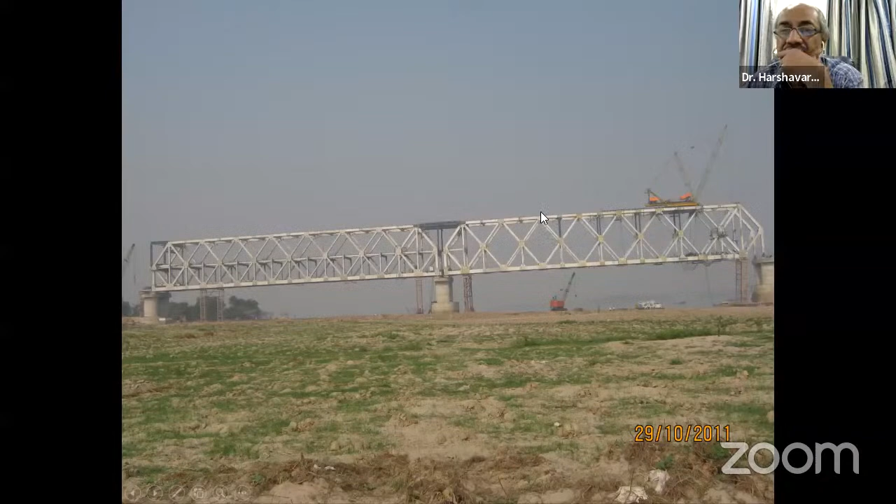This is the first water span in the water, and you can see how we have done load shedding. Sometimes we require some temporary members. We did this in the first case. We don't need it later on, but we wanted to make sure nothing would happen in the first wet span, so we put these members to see if they are undergoing any stress or forces. They were not required as per design.

Later, we did not need them. And as you can see here, a lot of these members - the whole road deck, the complete road deck of maybe 1,200 tons of concrete deck, is not there during the free cantilever launch. Only the bare steel.

So once I complete my truss, the camber, this upward camber that I should get at the bottom chord in the center, it should have hogged up by 57 millimeters. When I've completed my erection at the center, I should have a hog up of 57 millimeters as camber. So that has all gone well - the erection has gone well with my steel weight only.

So this is the situation of free cantilevering. On one side, it was water everywhere and we had to make a temporary bund, and over that we had to bring material from the side and dry feed.

And feeding happens not at this level - feeding happens, you see the dip lorry here, this is the dip lorry. We feed all our elements onto this. The fellow goes zoom ahead with a winch crane all the way to the front.

And from this level, because the road deck has no member there, and one truss, two trusses behind, we stop the road deck cross frame members and cross members. From the dip lorry, which is on temporary rails below, this fellow picks up the elements from the central feed and helps in the triangulation of this forward piece of the truss.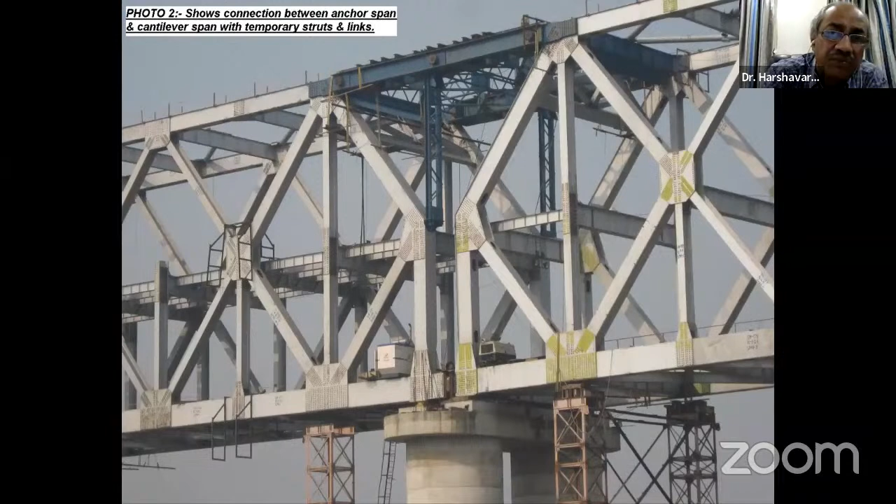Everything has to be meticulously designed, and you see the cross members, cross trusses, to take and hold this rigid, because this is what is transferring the moment. It becomes a two-span continuous structure. So the moment that is happening in the hogging, when it is hogging downwards in the front side, gives an upward moment in the back span, which has to be counterbalanced as the two-span continuous, which is changing all the time as you increase the length of the forward truss in the cantilevering.

So the ballast and the kentledge are used in the backspan when required. And these are the very important features of the free cantilevering arrangement, which you can see happening now.

Here you see the follow crane. We have touched on the other side. The follow crane has already come and started to do its work of filling up in this truss all the leftover load shedded members during the erection of this truss.

Now that we have touched on that side, we are on temporary bearings, etc., we are robust. Then immediately after, those members are taken away and this fellow has done filling up of all the steel members which come on this dip lorry at this level. It picks up and fills up all the road deck and whatever load shed members, etc. It has finished its work.

We remove this temporary link - that blue temporary link is now removed. This work is over, right? And we go on with the free cantilevering arrangement ahead.

If necessary, we can always put another follow crane on top and do this. A crane like this costs in lakhs. Can you imagine the innovation of working over the Ganges? We erected 36 spans without any accident, no loss of life, over the Ganges. Full erection supervision was done by my firm, Construma.

Here you see the temporary rails and how that dip lorry at the end feed is rear feeding from the shore side. We fill up all the stuff required, this member or that member, in the forward part of the truss. It goes by a winch, operated by a winch - it goes pulled by a winch, this dip lorry.

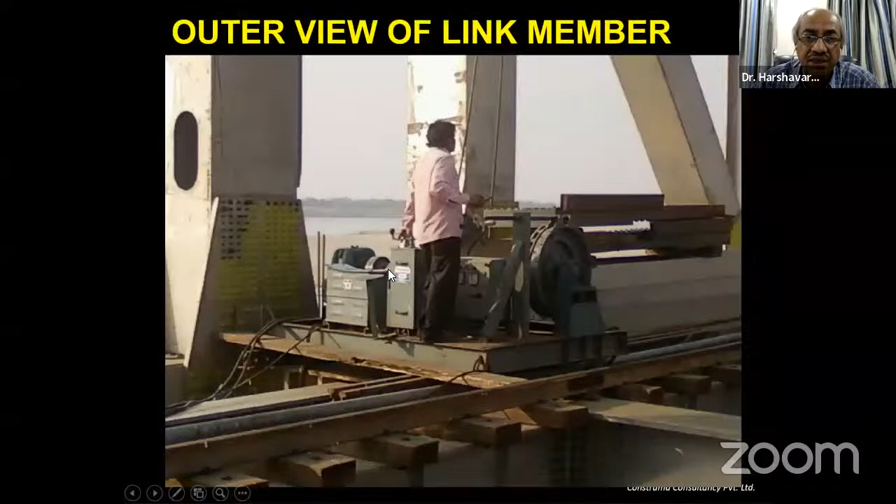It goes by this winch. It is pulled ahead to where required and the crane picks up. The lorry is there, it picks up and triangulates the front of the truss. You can see here a wire which is holding up a temporary hanger, what we call a hanger wire in steel, with a turnbuckle arrangement.

You see that slightly upward kink because I want it to arrive there, just above my bearing. So it is slightly upward, and the buffer block at the back has that little curvature I told you about. Here you see we're slightly nose upwards, slightly biased upwards, so that when the full weight at maximum cantilever comes, it touches down.

You can clearly see the hanger elements used to pull up this bottom chord. By the turnbuckle arrangement here, we line up all the holes of the rivets by clever use of these hanger elements. We line up all that and then we put in our bolts and drifts and then we do all our riveting. So this is how it works.

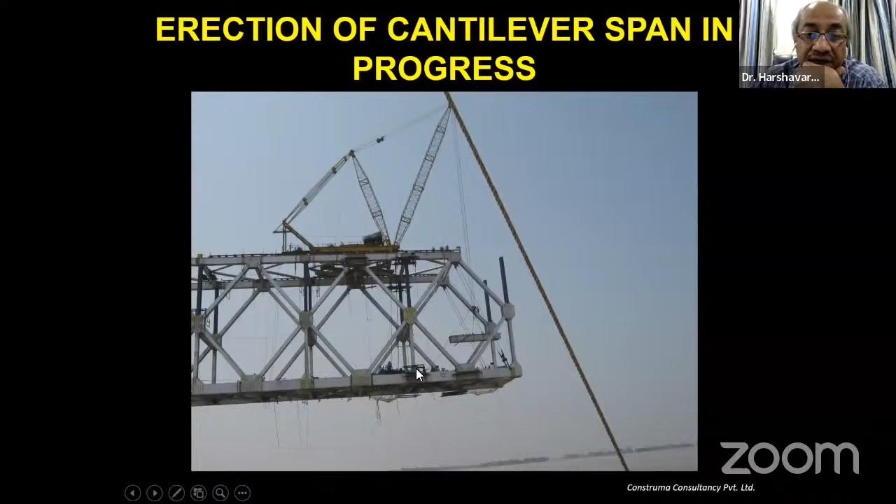You see that on the turnbuckle at the top. He picks up from the dip lorry at this level. The road deck is yet to be done. Other views now.

All different views. You can see how from the dip lorry here, that fellow has been picked up by the top thing. And this is the tube I told you, whose diameter and thickness have been specifically chosen to set it close to yield.

You can see how they are joined by just a very flimsy in-plane joint here, just sufficient. You can see this joint here. This is also a characteristic design, and they go and join these kickers in between that K base and the kickers at this point. This point is very robustly designed, where the two tubes come and join.

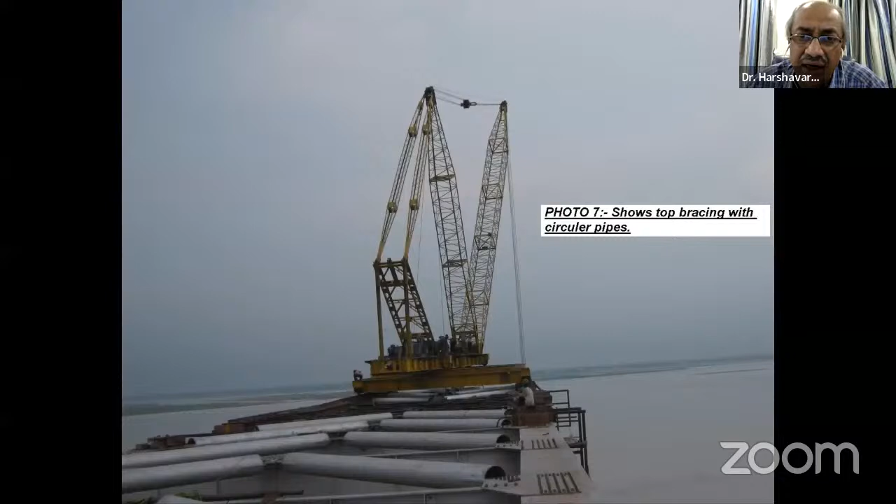And these tubes are the fuses which I spoke to you about, set close to yield. So when the earthquake comes, they will yield and keep yielding, doing their work by being close to plastic buckling. As they buckle and go plastic, they will continue to yield and dissipate the earthquake force.

Sometimes we need jugaad like this, in case it is not coming at level. We need to put some jack on a floating arrangement and lift it, because it's not a joke cantilevering 123 meters from pier to pier. This is from here to here, 123 meters.

You can run more than 100 meter race inside each truss. You see the jacks and all that. Sometimes we need here also, so that it comes onto that bearing.

Here you can see a clear view of the heightened and fully integrated built-up pedestal. You see what I was telling you about, the fully built-up and integrated pedestal on that side and on this side. This little white arrow where I've shown you.

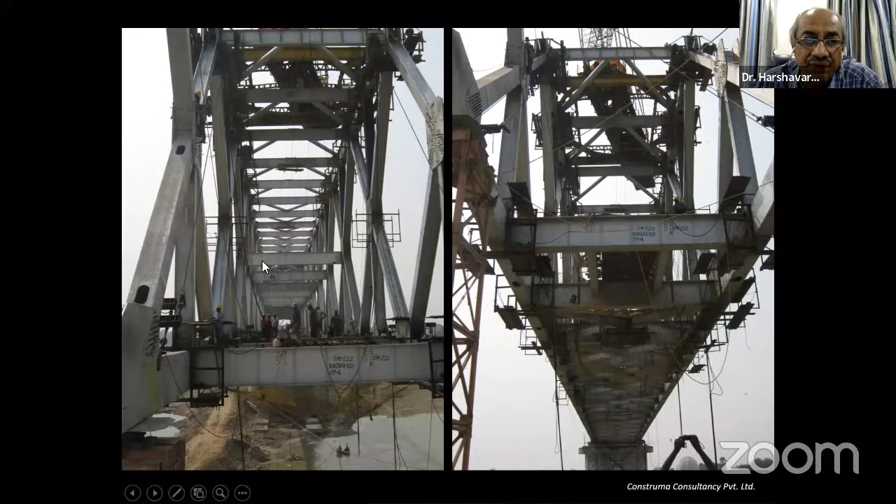And this is the simple views. You can see the tubes at the top. You can see the road deck level cross girder coming in here, road cross girder, rail cross girder, how they are framed, and you can see these cutouts in each member for a man to go in to do the riveting inside. Afterwards, these are closed with an FRP plate or a steel plate, closed and sealed for preventing water from going in.

You can see the man gone inside to do the riveting of all these. The pins, you can see projected pins and drifts to get the alignments right. The joints are so complex, getting everything aligned.

We need to pull this fellow up with a hanger, pull him up so that he comes in plane with this fellow and all that. Then the gussets here will be put on. So all these are accessed, inward access by these specially designed oval cutouts.

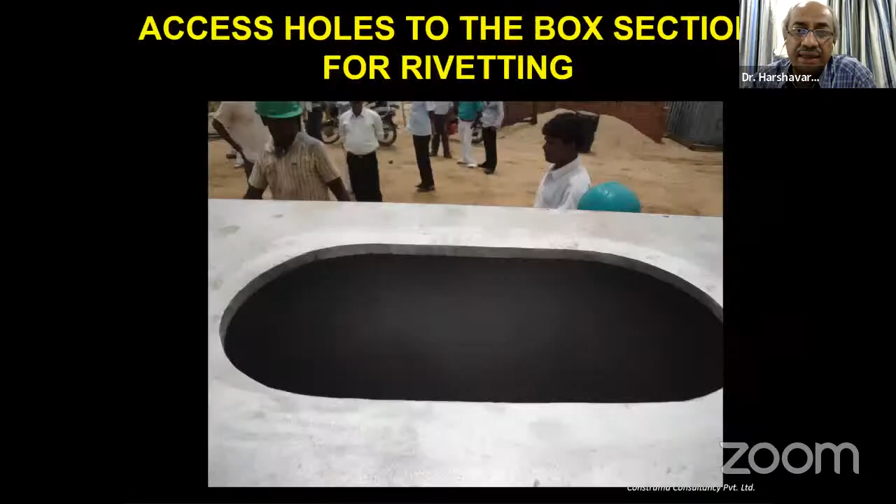Just the size of the cutout, you can see, if that is the size of a man, what is the size of the cutout in those bottom chord elements. Then the connection of the top bracing, I told you about these tubes, how they are connected. You see, this is the diagonals at the top, going down from the top chord. Here is my kicker.

You see this kicker, very robust, moment taking. You see the bracket also - it's a fully moment taking connection. When you hold the flanges robustly, then you take moment through the flanges and also through the webs if they are very well fully connected. So it's a moment taking connection, of course, because of sway in a portal, right? So that is a sway moment taking connection.

And here you see that thin plate, and the fact that this fellow will buckle and then go plastic and continue to do work, these fellows. And this is the typical arrangement that we have.

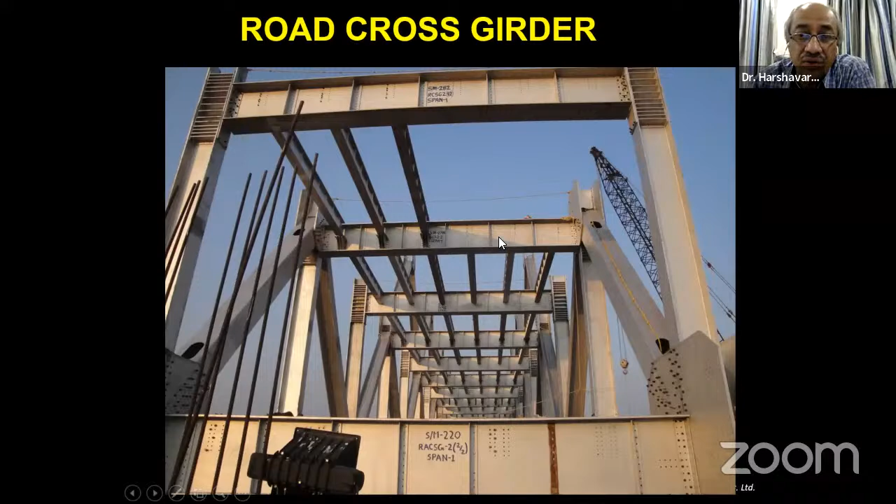And here will be the other members. See, you can see that coming to this one, this coming to this one, here and joint here, there and joining on this kicker. And we put special extra strengthening at the kicker location, at the center of the kicker. You see the various members going on - the deep lorry, then the rail stringer, the road cross girders coming in, the road stringers or road cross stringers coming in.

A typical joint of members, how complex it is, and drifts are - all the riveting is yet to be done, and so on, right? And typical rivets, how they are shaped by that heated rivet.

Maybe it is very crude, but it ensures that the hole, because of the drift bolts and pins that they use - pins and bolts, drift bolts - the perfect hole is made, over-shaped, or it is then under-reamed or over-reamed. And then that has to be completely filled up only by this red hot, and hammered into place, the rivet.

Again, you see a typical joint. At the bottom, the eye girders, the eye wind bracing at the bottom, which would have been star angles, but are very robust. You see how one member goes through and the other member comes onto the gusset. Okay, one member goes through, the other member is cut here and is held on these two gussets. This is also what you have to see.

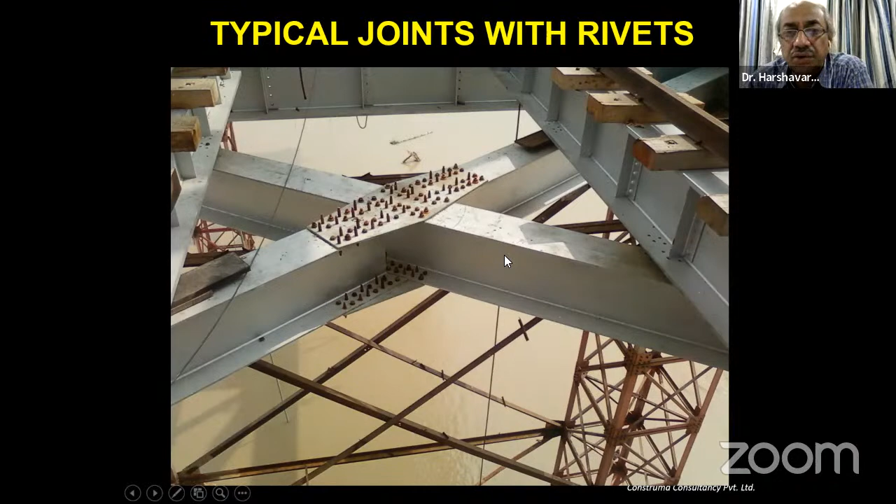Always in an X like this, one member you should take through, the other member you should rivet and do up the joint, so that the effective length of both the members is then controlled. The issue is, of course, to break the effective length. And buckling.

Some snaps showing you what it is to fill a truss, and the awe with which these people go to this structure is something. It makes me very proud that you can't see the other end. You just cannot see, and clearest of day also you can never see the other end. This is what it looks like finished.

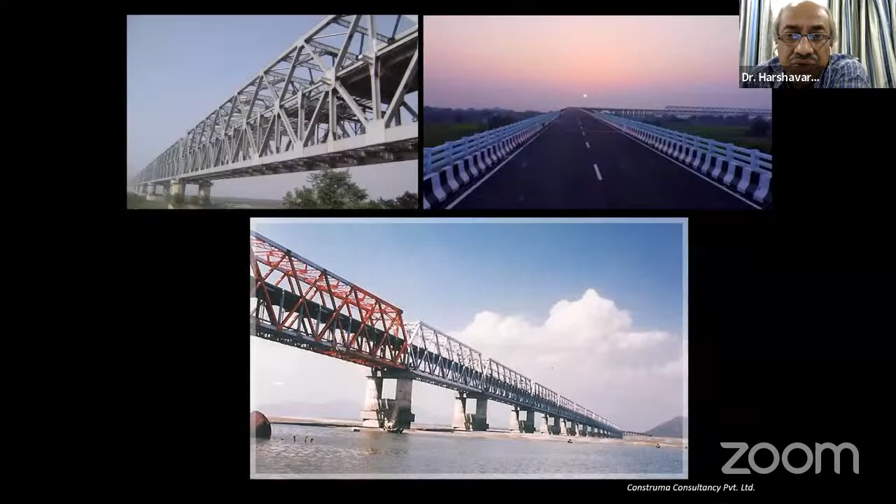Okay, these are snaps in use just before, prior to commissioning, the approach road going on here. You can see the road deck entering the truss. This is the approach viaduct. You can see some photographs here of the truss just before commissioning, some finishing works, etc.

Few days before - the road deck, concreted road deck, you can see here. Some finishing just before the work is completed in all respects. Just prior to that, this photo was taken a few months before opening to traffic. And then you see here the length, the actually completed structure, and people going there to just look at it in awe.

You see the curves over the horizon. Even whatever you do, you can't see the other end. It is curving over the horizon.

This project inspired the then CEO Madhuresh Kumar and Mr. L.M. Jha to get together and write this book on the journey of the Patna Rail Road Bridge. It was inaugurated by the Prime Minister. At one point, two of my projects were in the Prime Minister's monitoring list of 50 projects - Munger as well as the Patna Rail Road Bridge.

I want to tell you that a book has been written, so unique is this bridge, and so deserving. I think that what we did is documented. You can buy this book - it has just come out on Flipkart. You can buy this on Flipkart, and it is available on Flipkart.

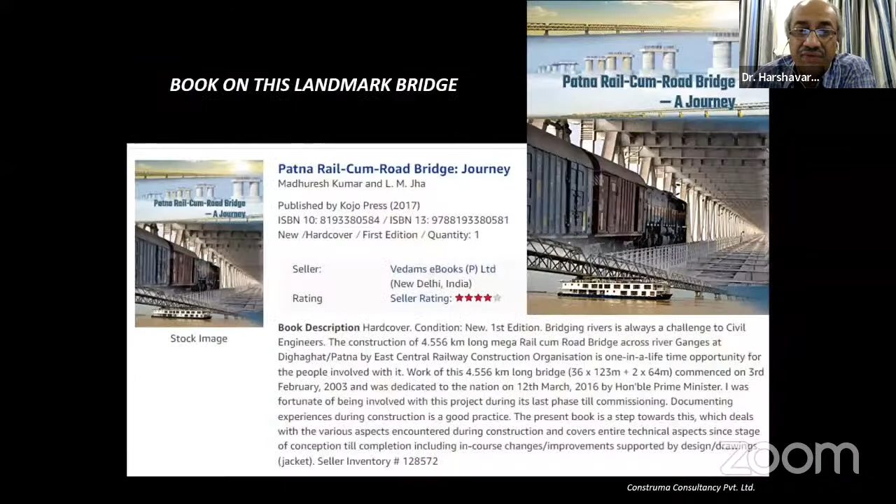The pylon is a symbolism of modern India reaching out and an aspiration of youth to be modern and to progress, demonstrating to the world that we need modernity. It's a reflection of that.

The deck is a complete steel composite deck. At some other time, maybe I'll talk to you about its design. There are so many innovations here too, not only in the deck but the foundations, the superstructure, and problems overcome during construction. There is so much to discuss, and I will save that for another day.